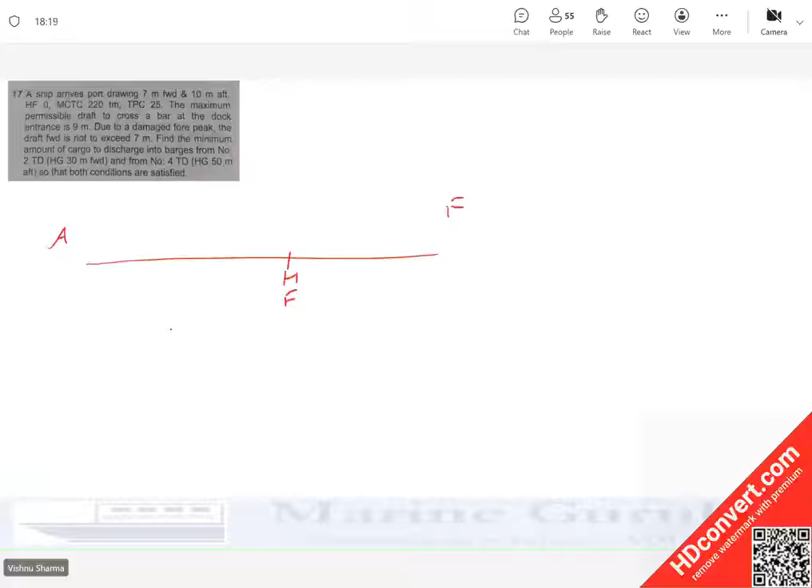So you should basically be loading to the maximum possible level so that you can safely cross the bar. So I know what doubts somebody may have. Once I make the line diagram, you will be comfortable. AF will be half the length, whatever the length is. It's not given here, L by 2. Okay, never mind, never mind, it's okay.

So forward draft is 7 meters, aft draft is 10 meters. When you cannot have the forward draft exceeding 7 meters, so you have to maintain it at 7. And aft draft, you have to cross the bar at 9 meters. That means you have to bring the aft draft to 9 meters. Correct? Yes or no? Am I right, sir? Yes, sir. Okay, so now basically you have the initial drafts forward and aft, and final drafts forward and aft.

So what you can find out is initial mean draft. And when you do the initial mean draft, L will get cancelled out. It will be the mean of these two: it will be 17, 8.5 meters will be the initial mean draft. Why? Because center of flotation is midships, right, beta? Am I right? Who had the doubt? Initial mean draft will be 8.5, yes or no, beta? It is mean of 7 and 10, correct? Final mean draft will be mean of 7 and 9, that is 16, 8 meters.

Okay, find the minimum cargo to discharge. So the mean rise that you expect is 0.5 meters, which is 50 centimeters, into the TPC of 25, that gives 1250, so many tons is the total cargo to discharge, right?

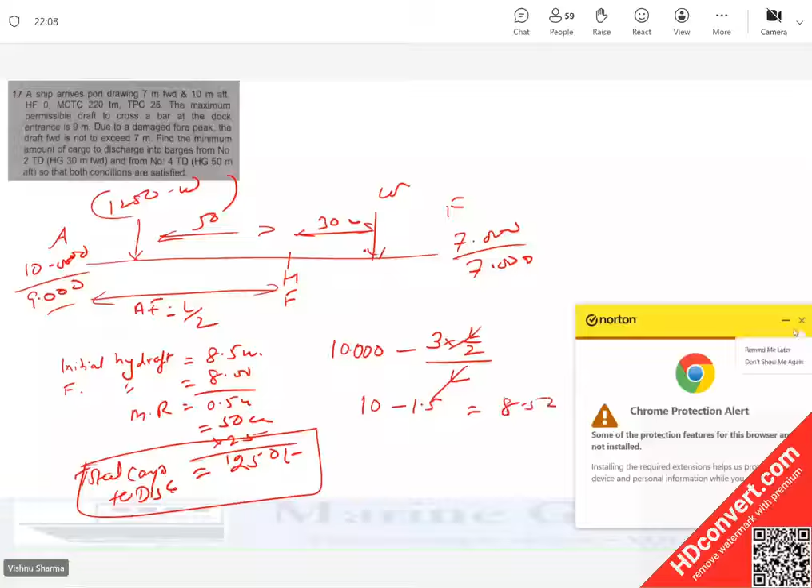You were saying aft draft minus the correction. Initial trim is 3 meters into AF. AF is L by 2 upon length, which is L. L and L gets cancelled. It becomes 10 minus 1.5, which is equal to 8.5. What is the issue? By your formula, you're getting 8.5, yes or no? Yes, L and L gets cancelled out, right?

Aft draft minus correction will also give you 8.5, yes or no? Am I right, sir? Yes sir, yes sir, right sir. Yeah, you can calculate also. So if you want to just stick to what you learned earlier, then also it will give you 8.5.

Likewise, the final draft will be 9 meters aft, 9 meters aft minus correction. Final trim is 2 meters. So 2 meters into L by 2 divided by L, L gets cancelled, equal to 1 meter, 9 minus 1 equal to 8 meters. Final draft, the mean draft is 8 meters. Correct, yes or no? Okay sir, understood sir, understood. Yeah, so by calculation also it will give you the same answer, don't worry.

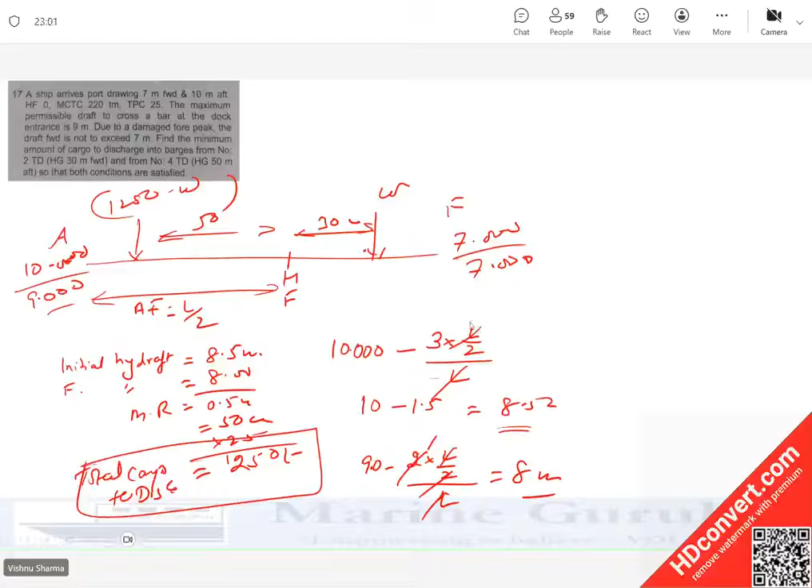Question number 13, guys. A ship 160 meters long, MCTC so much, TPC so much, HF 3 meters aft, draft so much forward and aft, from where W tons may be discharged such that the draft aft remains constant. Okay fantastic, let's make the line diagram. And guys, if anybody is not understanding, you can unmute and interject anytime, please.

Aft draft is 7.8. He wants it to remain constant. Now tell me guys, he's talking of discharging. So tell me, when you discharge, look at the aft draft, which was initially 7.8. When you discharge something from the ship, will it cause rise or sinkage? Rise. So if I apply rise to 7.8 aft, will the draft become more than 7.8 or less than 7.8?

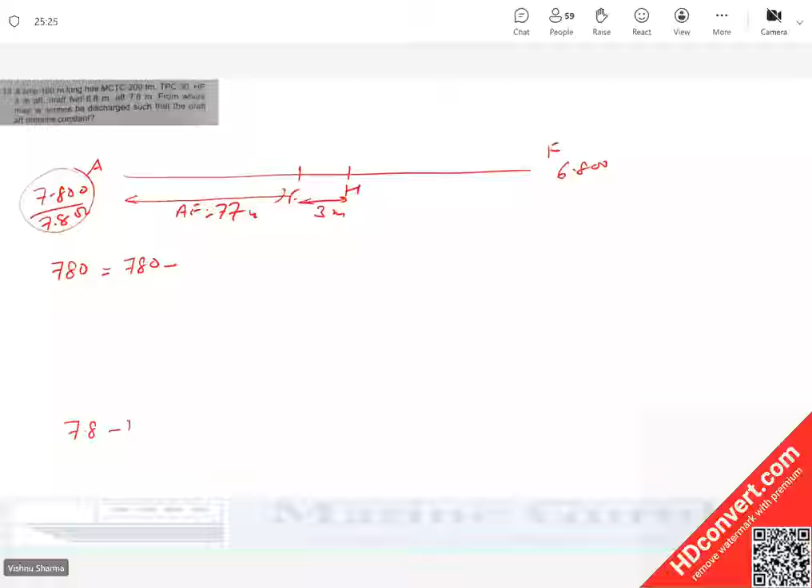I have 7.8 minus mean rise plus or minus TA. I have only two options, either to add or subtract, should be equal to 7.8. So if mean rise is minus, then TA should be plus, correct? For TA to be plus, what should be the name of the trim? By stern. For TA to be plus, the name of the trim caused should be by stern.

What is causing the trim? Discharge of W tons. So where should I discharge so that the trim is caused by stern, guys?

With respect to center of flotation, should I discharge from forward? Let us say I discharge X meters forward of center of flotation. So now you see, 7.8 gets cancelled. This implies mean rise and TA are equal.

What is mean rise going to be equal to? Mean rise will be equal to W upon TPC, and TPC is 30. What is TA equal to? It is going to be equal to TC into AF upon length of 160. Look at the line diagram. What will TC be equal to now? TC will be equal to W into X upon MCTC of 200.

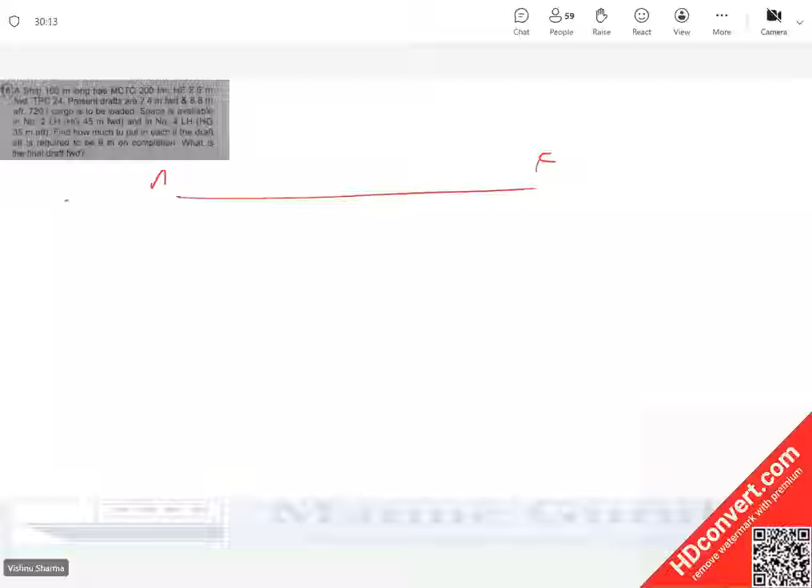So 7.4 forward draft is present. Aft is 8.8. Final draft is 9 meters, is it? Yes, 9 meters. Center of flotation, no sorry, H, my mistake, sorry, H. Center of flotation is 2.8 meters forward, so F is here, 2.8.

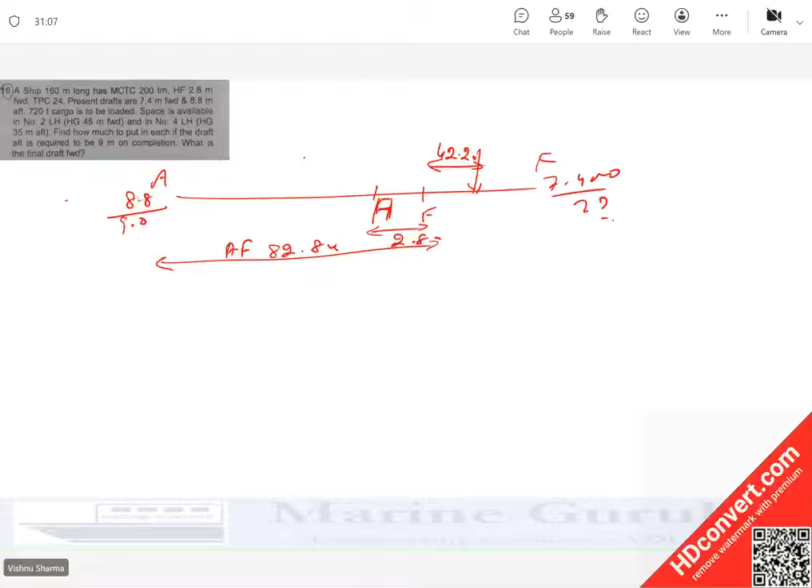Length is 160, so 82.8 meters is AF. Then you have the space available in number 2 lower hold, somewhere here you want to load. This distance is 45 minus 2.8, so that will be 42.2 meters. And you have 35 meters aft somewhere here. This distance will be 35 plus 2.8, which is 37.8 meters.

Total to be loaded is 720 tons. So let us say W tons is put here, so 720 minus W is put here. Now, what is the issue?

Tell me, Inder. Did you make a line diagram like this? Where did you get stuck now? Tell me, did you get W or not?

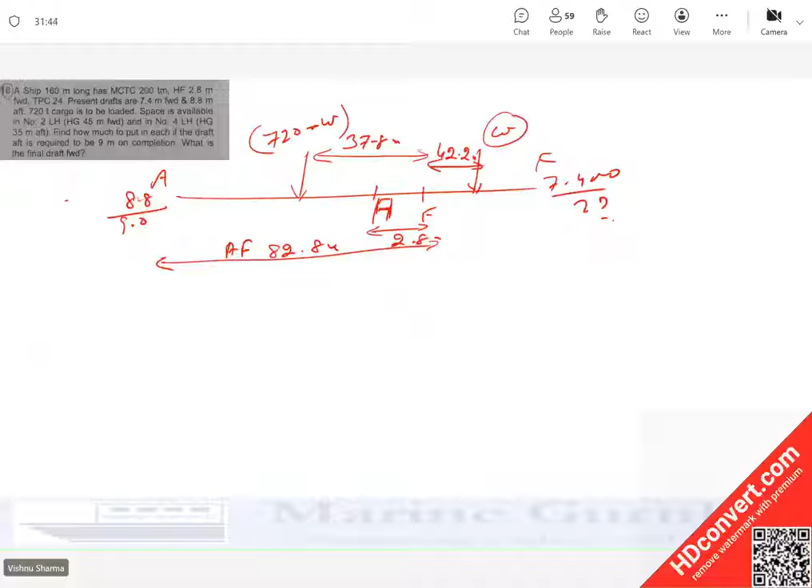Now this example, a ship - don't worry about these things, it will just unnecessarily confuse you. Don't learn anything like this. Learn it with basic fundamentals.

A ship has to load 600 tons of cargo. Drafts forward and aft are so much. This is the question we have just discussed, yes or no?

What is the issue? Yes sir, but in this, at the end to find the draft, sir, I got the weights.

Okay, let me make the line diagram. Drafts forward are 8.5 and aft is 9.7.

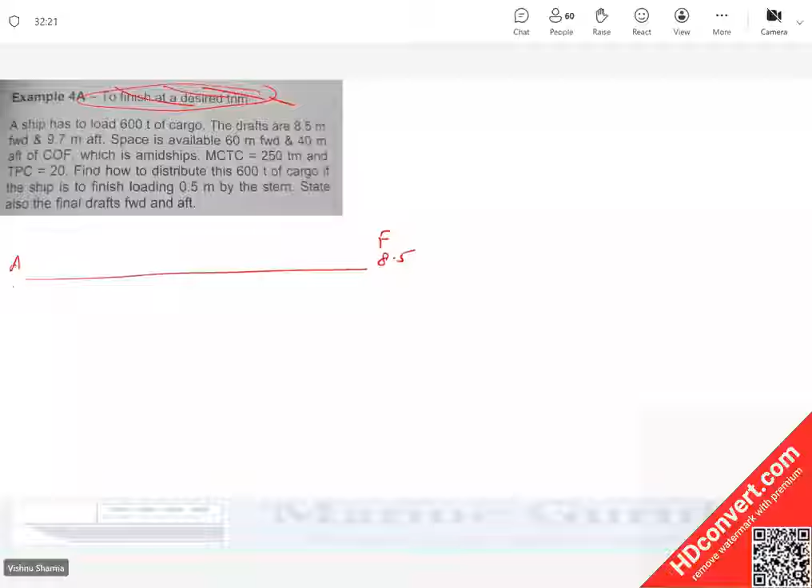HF is COF, which is midship, so center of flotation is midship. So AF is half the length.

So 60 meters forward to load, distribute if ship is so loading. Okay, so 60 meters forward, and you have another space 40 meters aft, another space available, so much, okay.

And TP, how much cargo to distribute this? How to distribute 600? So this is W and 600 minus W.

If the cargo ship is to finish loading on 0.5 meters by stern, so you make an equation in trimming moment. You know the initial trim is 120 centimeters, so final trimming moment will be 50 centimeters.

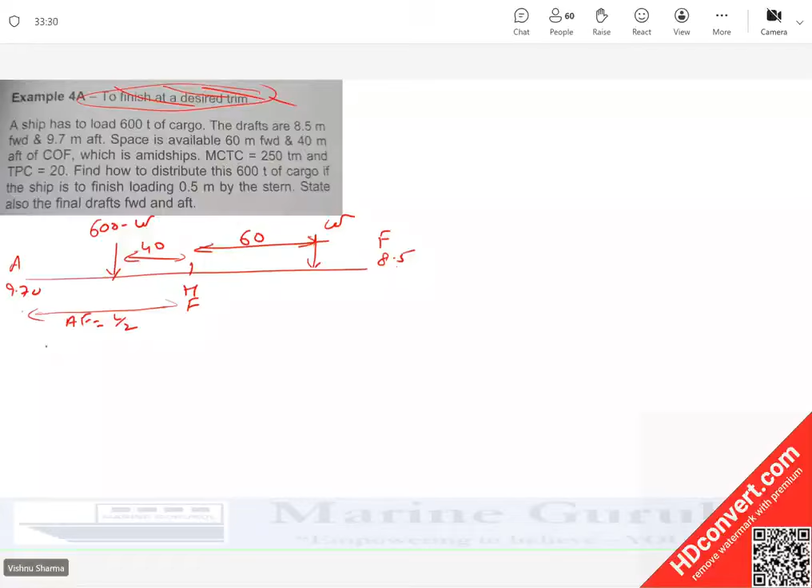So that is the trim. Taking trimming moment by stern as positive and by head as negative, final trimming moment will be plus 50 into MCTC. If anybody is not understanding, let me know.

This will be equal to initial trimming moment, which is plus 120 centimeters of trim into 250, plus or minus the trimming moment caused. W tons is going to cause trim by head, so minus 60W plus 600 minus W into 40, and this will give you the value of W.

Correct, Peter? Am I right? Yes sir. How much did you get, Peter? Abhishek, how much did you get? W? Sir, I got 185 tons.

So 185 tons, how much goes in the forward compartment? Sorry, 415 goes forward and 185 goes aft. Is this matching with the solution? Yes sir.

Okay, fantastic. Now your problem is to get drafts, right? Correct, beta? Okay, now with this, what can you do? Simply, there are two ways of handling this question.

One is you can find the initial hydrostatic draft minus the rise. So there are two ways of doing this question, whichever way you feel comfortable. One is calculate the initial hydrostatic draft, which will be equal to final initial draft minus the correction.

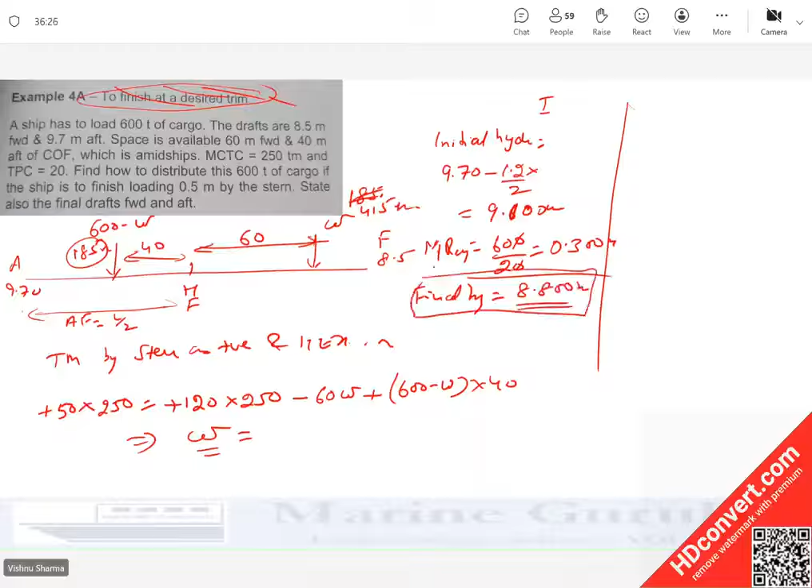Right sir, correct? Okay, what is the final trim? Final trim is 0.5 meters by stern.

You can split 0.5 into TA and TF since it's midship. It will be 0.25 meters here and 0.25 meters here. It will be equal, right?

So your final drafts will be forward and aft. Your final hydrostatic draft is 8.800, 8.800. TA and TF, and ask yourself, of what? TA TF of the final trim, which is 0.250. Since the final trim is by stern, TA will be added, TF will be subtracted, and this is one way you can get the final drafts. Okay, guys?

Abhishek? Right, so it's not matching in the question. It has to match, unless we see if we made any mistake. That's all you have to see. There cannot be. Let me calculate it the other way also, and if it does not match, then we'll see.

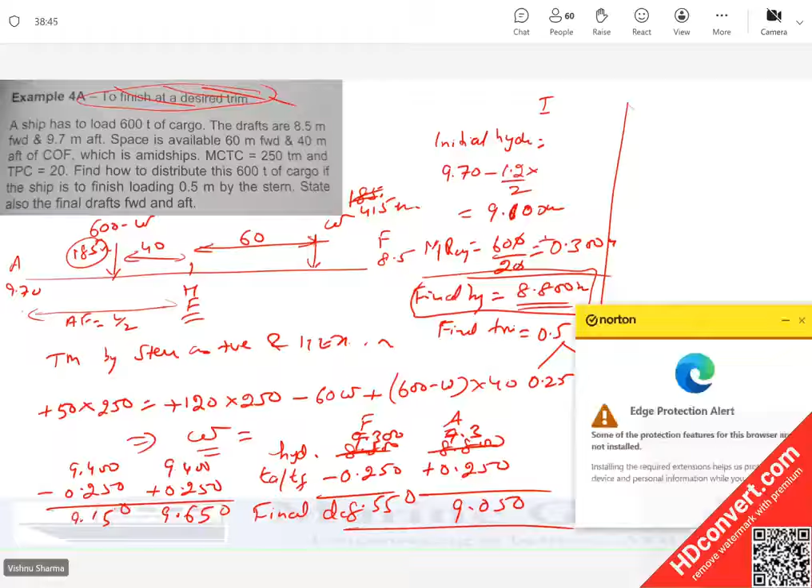Yes sir, now it's matching. 9.150, yes sir, 9.650, okay? Yes sir, that is what we didn't take. Understood.

Since I'm on the subject, let me do the other method also for the sake of people understanding it. Because when I use it in dry docking and grounding, now we know the initial draft forward, we know the initial draft aft. By using this, we can find out the trim caused. Now we know the trim caused.

Actually, when you have the final trim, you don't have to calculate initial and final change in trim, you can write like this. Initial trim is how much? 1.2 meters by stern. Final trim is how much? 0.5 meters by stern. So trim caused is 0.7 meters by head. Is that clear to everybody? Change in trim is 0.7 meters by head, right guys?

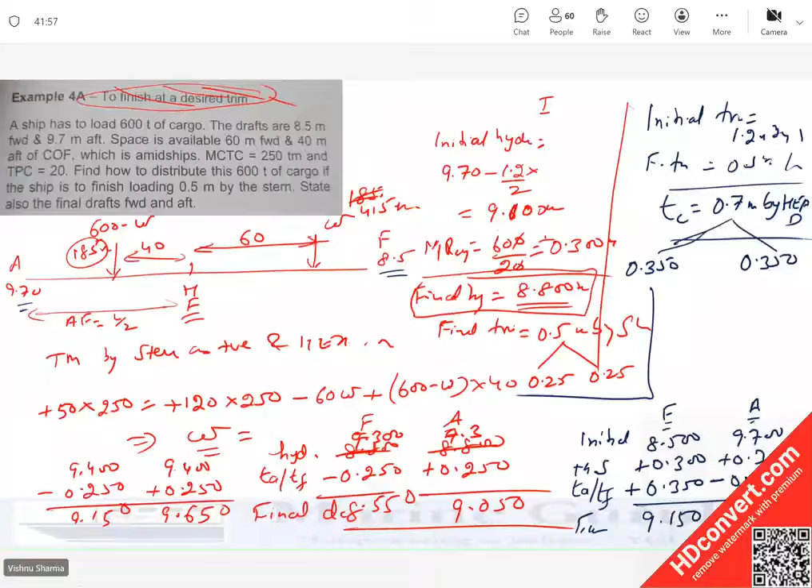If you want to learn like this, tell me.

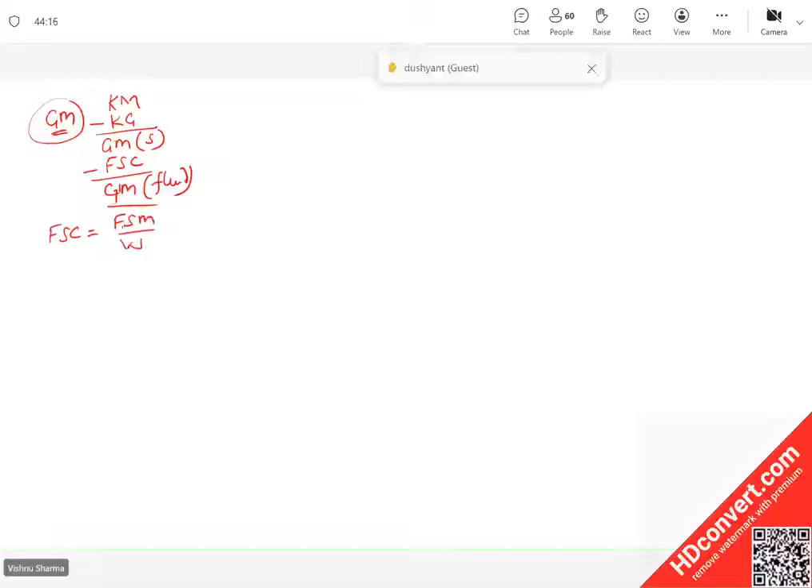No sir, no question. Okay, so how do you calculate FSC, guys? FSC is equal to FSM upon displacement, right? And that goes here. That is one part you need to recall.

Second, when you discharge weights, let us say we have a ship like this. Let's say the ship has a weight W here, whose kg is, let us say, kg1. And now the ship's full displacement is capital W, and the center of gravity of the ship is here.

Now, if the weight is discharged, which side will the center of gravity of the ship shift? Tell me, guys. If this weight is discharged, small w is discharged, which side will the center of gravity of the ship move?

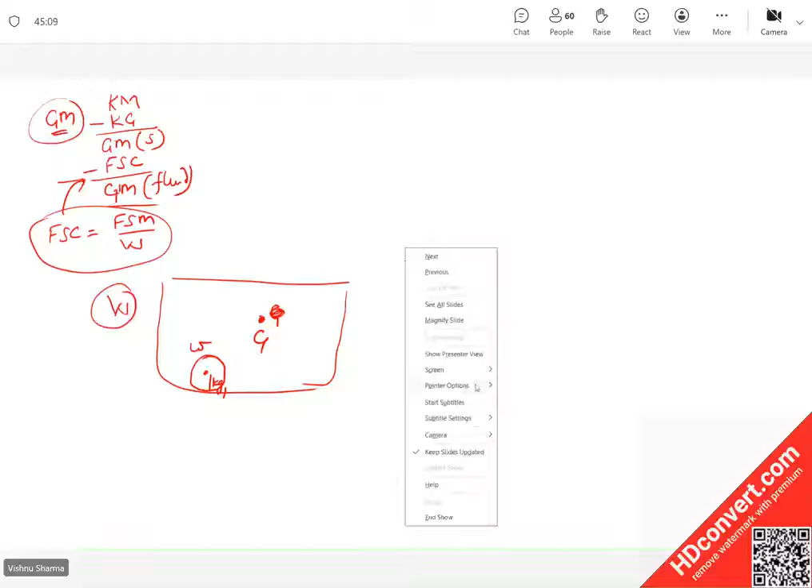Away from the discharge weight, upwards. So you join these two lines, and it will move in the opposite direction somewhere here. I'm not interested in how much starboard or port it has gone. Since I'm talking of GM, what will affect is how much it has gone up. So we are only interested in this component of the shift.

And this component, in pre-sea, was called GG1 vertical, downwards or upwards as the case arose. And when weight W was discharged, what was the formula for how much it shifted? This is that GG1. In this case, it is upwards. In some other case, it could be downwards also.

And we know from pre-sea, it was D vertical upon, in this case, since we have discharged, generally it is W final displacement. But in our case, since it was discharged, it is W minus w. I'm sure all of you can remember this formula now from previous learning.

Anybody has any doubts? Guys, tell me if any doubt is there. I'll be happy to answer it now.

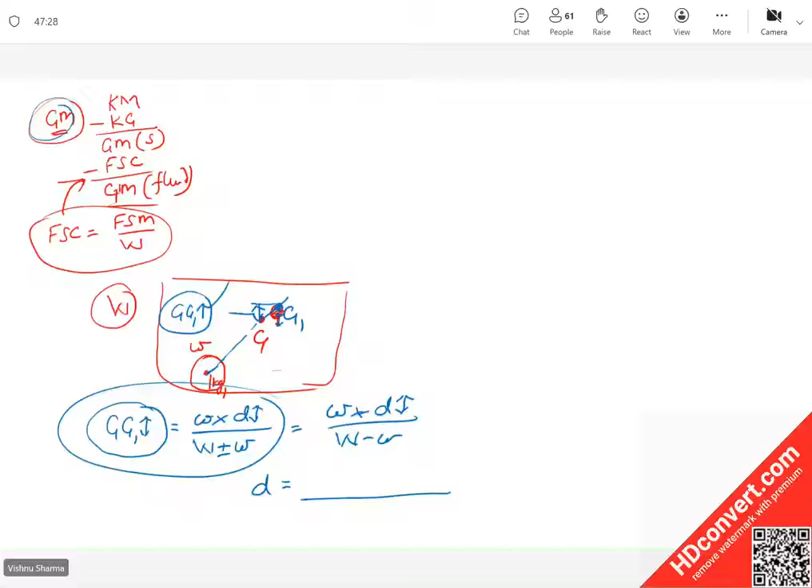It's the vertical distance between the kg of the ship before operation. Before operation, where was the center of gravity? At G. And center of kg of weight W. It is the vertical distance between them. Danny, can you remember it now? Yes sir, yes sir.

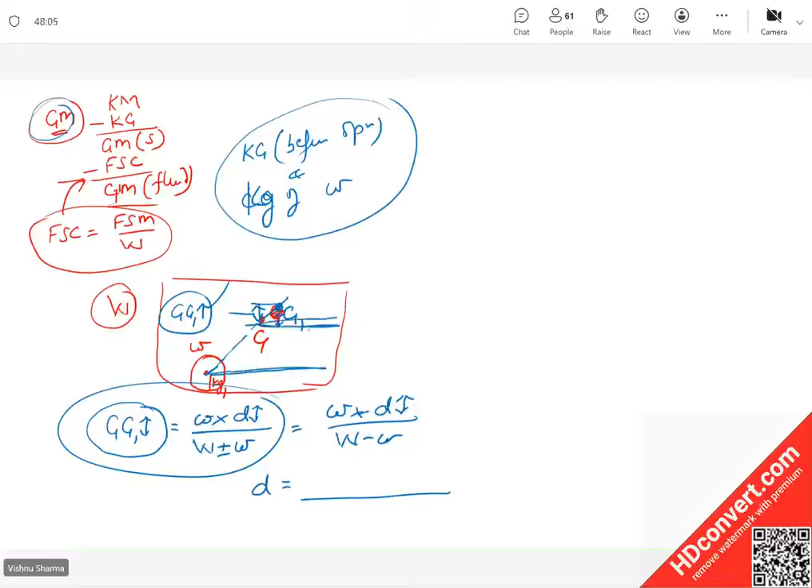Okay, so please don't make these mistakes. So in this particular case, here was the center of gravity of the weight. Here was the center of gravity of the ship before discharging. D will be this distance. Correct, beta? So it will be basically what? Kg of the ship before discharging minus the kg of the weight involved. Correct, beta? That is your D here. Am I right? Correct, yes sir.

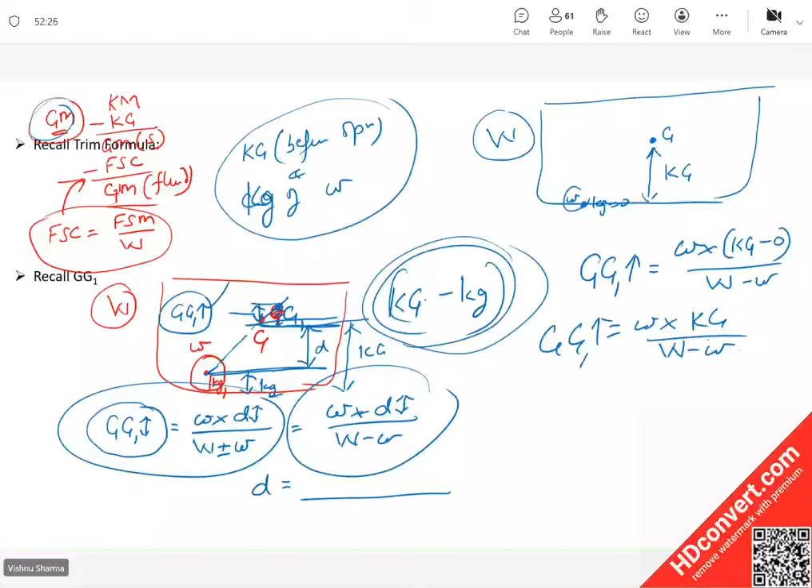Am I right, guys? And G will move upwards. Correct? Yes sir. So guys, remember, if a weight is theoretically discharged from keel, then it will shift the KG of the ship upwards to a distance: w into KG of the ship before the operation, divided by W minus w. And we have used this GG1 formula - we have not done anything new, correct? Remember it, don't forget.

Okay, now tell me secondly, yesterday we did the trim formula. Let us say we have this ship's forward end, this is the aft, and it can be either side, doesn't matter. Let's say here is the center of flotation. This distance we all know is AF or LCF.

Now suppose if I discharge some weight from here, let us say P tons. Will it cause a change in trim, yes or no? Yes sir, it will cause a change in trim. How much will be the change in trim? We have done the formula yesterday.

That's why we were doing it - look at that line diagram and answer. What will be the change in trim? P into LCF divided by MCTC. Does everybody agree?

This is P multiplied by lever AF, divided by MCTC, will be the trim caused. Does everybody agree with it? Yes sir.

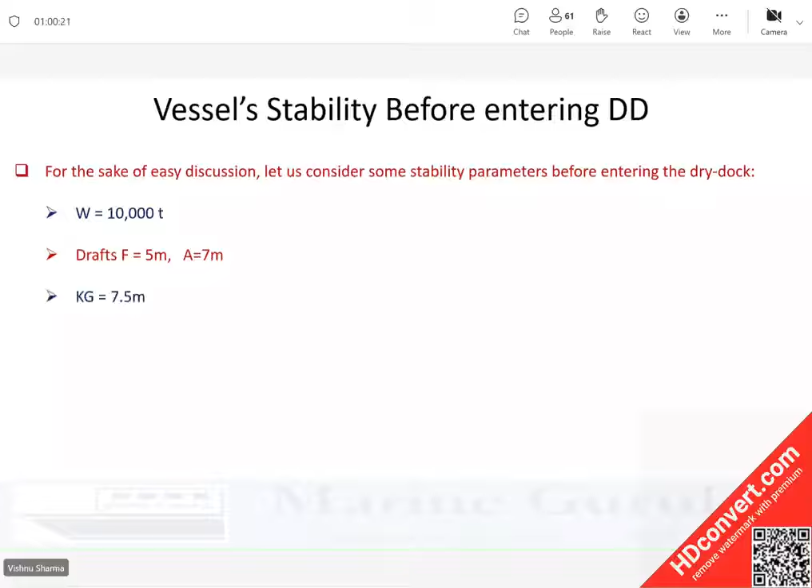Let us say the ship has a displacement of 10,000 tons. Her drafts are 5 meters forward and 7 meters aft. Her kg is 7.5, LCG is 70 meters, and her buoyancy obviously will be equal to displacement. Why? Because the ship is floating freely as per the law of flotation. So what will support the weight? The buoyancy will support the weight.

Does everybody agree with me? The ship comes outside the dock like in this condition, correct? Now the gates are opened and the ship is taken into the dock.

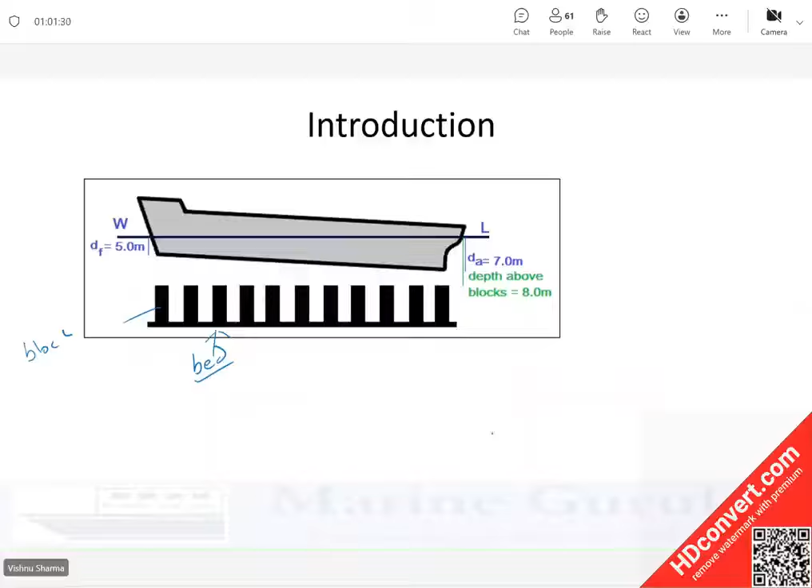Do you think anything should change in this condition? No. So that means just because she has come from outside the dock to inside the dock, her stability particulars remain unchanged and there is no change in stability. Does everybody agree with me?

Let us say here the depth in the dock is 8 meters. When we say depth in the dock, we mean the level of the water above the top of the blocks. This is what we'll call the depth, not from the bottom of the bed, because the ship is going to be stopped by the blocks. So we are not interested in the depth below the blocks. So if the depth is 8 meters, what will be the UKC of the ship in this case? Look at the diagram. 1 meter. So there will be 1 meter UKC here.

Now the gates are closed and pumping out starts. You have seen the ship in a tidal port. What happens? As the tide rises, the ship rises with the tide. When the tide falls, the ship comes down with the tide. Am I right? So now here, you are dropping the level of the water, not because of the tide, but because you are pumping out.

Let us say now the depth is reduced to 7.5 meters. What will happen if the depth from 8 meters is reduced to 7.5 meters? What do you think will happen? This water level will start coming down, and with the level falling, the ship will also come down. Will there be a change in draft? Do you expect any change in draft if the level is reduced to 7.5 meters?

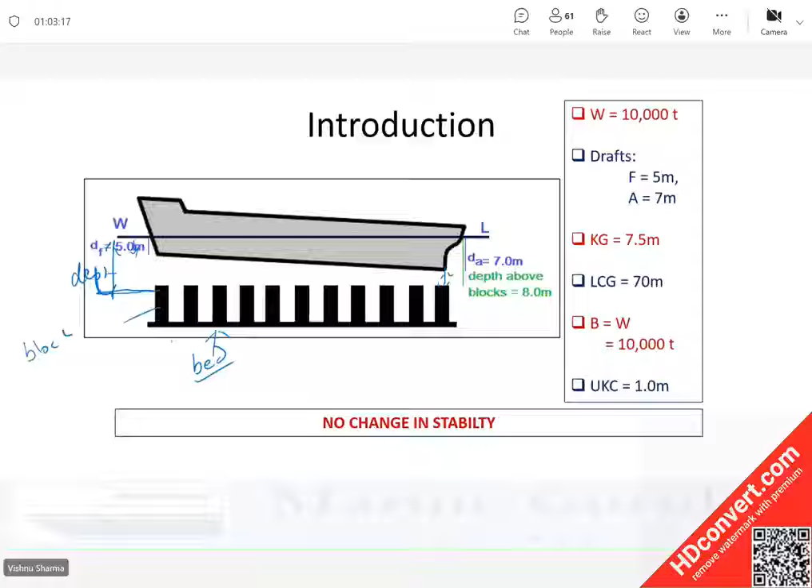No, sir. If the depth is now made 7.5 meters, you don't expect any change in the stability. Only thing is the UKC, the underkeel clearance, has now reduced to half a meter. Only the UKC has reduced. Otherwise, there is no change in the stability of the vessel.

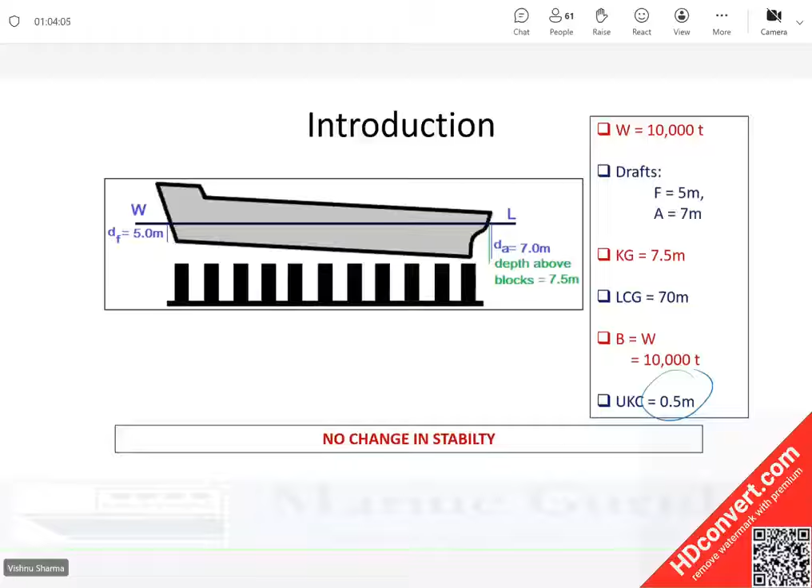Now I am saying the depth becomes exactly equal to 7 meters. That was the draft aft. Exactly 7 meters. What will be the UKC then? If the depth becomes equal to 7 meters? Zero. What will be the draft aft? If the depth is 7, it will still be 7 meters. Am I right? So if the depth is now made 7 meters, exactly equal to the draft aft...

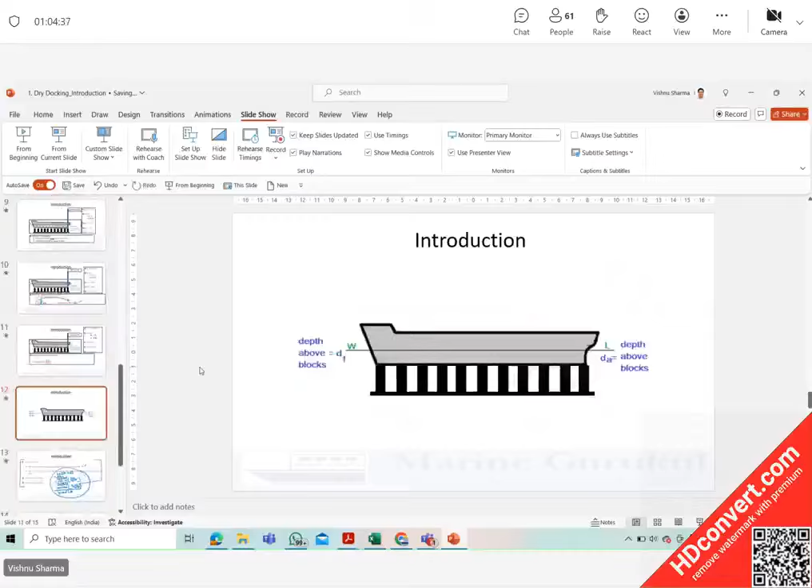Okay, let me just clear this part. Now the depth is 7 meters. Now, UKC definitely has become 0.

Do you expect any change in the stability of the ship, like drafts, buoyancy, center of gravity? No, sir. So what has happened? The vessel has established a light contact with the blocks. Where? At the stern. So we use the word light contact. Contact is made. It is just a contact, nothing else.

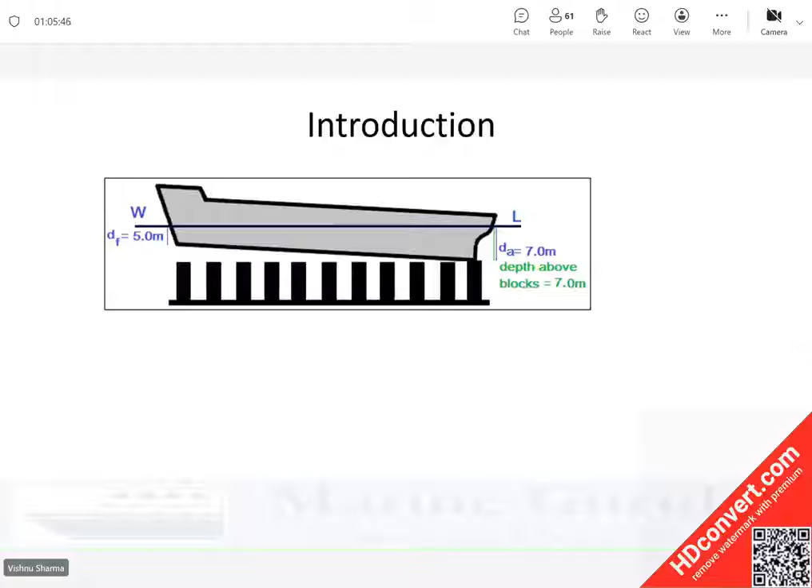In a crowd, when you're standing next to each other, one person may be touching the other. It doesn't mean the other person is still pushing it. So there is a touch, there is a contact, but there is no effect of that contact on the other person when it is only just a mere contact. Am I right, guys? So here the ship has made contact with the blocks.

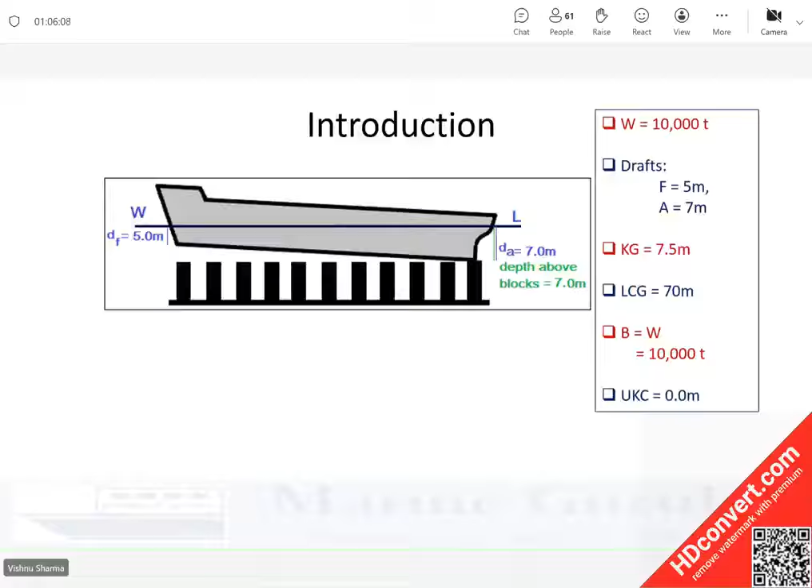But is there any change in the stability? No. So the only thing that has changed is the UKC has become 0. But UKC is an external thing. It has nothing to do with the stability. Stability remains unchanged. Does everybody agree with me here? What is supporting the 10,000 tons of displacement in this case, guys?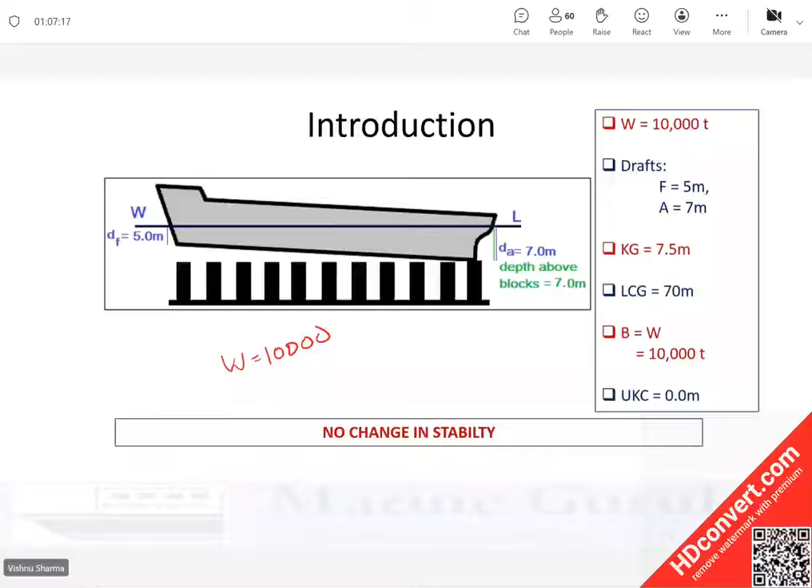In this case, what is supporting the displacement? What is supporting 10,000 tons of downward force? Buoyancy, sir. Why? Because there is still so much underwater volume, and the weight of water displaced has not changed. So the buoyancy has not reduced, and hence in this case also, though there is a light contact, the full displacement of the ship is supported by her buoyancy.

Guys, as the depth reduced from 8 meters to 7 meters, the water level was coming down, and with that the ship also continued coming down, because there was underkeel clearance. But now the underkeel clearance has become zero. Can the ship continue going down if the level further falls? No, sir, it cannot go down further. The stern will be blocked by the blocks, which will check the stern from going further down.

So what was happening was, all this while, the ship's forward draft and aft draft remained unchanged. That means the water line and the ship, relative to each other, their position was the same. But now, suppose I bring the depth to 6.5 meters. What will happen? This liquid level will fall, but the ship cannot go down. So now the liquid level may be somewhat like this - not exactly, but don't worry. Level has come down, but the ship cannot come down.

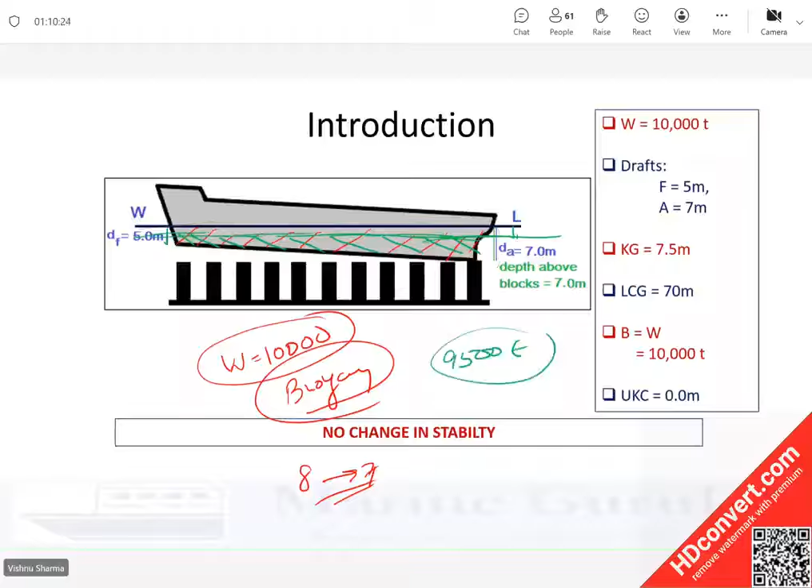Let's say this green volume provides buoyancy of 9,500 tons, just as an example - it has to be less than 10,000, so let's say it's 9,500 now when the level falls to 6.5 meters. What will happen now? 10,000 tons is the downward weight of the ship, out of which 9,500 is supported by the buoyancy. But what is the resultant now? There is a resultant 500 tons of force, downward.

Upthrust - you have 10,000 tons acting downwards, and 9,500 provided as buoyancy. There is a resultant or net force of 500 tons acting downwards. Where will this force exert? This force will exert wherever the ship has made contact with the block. In our example, the ship has made contact at the stern.

So if the contact has been made at the stern, this 500 tons will be exerted downwards by the ship on the block. And what is Newton's third law of motion? To every action there is an equal and opposite reaction. So when the ship exerts 500 tons of downward force on the blocks, the block will exert 500 tons of reaction acting upwards. Whatever force is exerted on the blocks, the blocks will exert equal and opposite reaction. This reaction in dry docking is called upthrust.

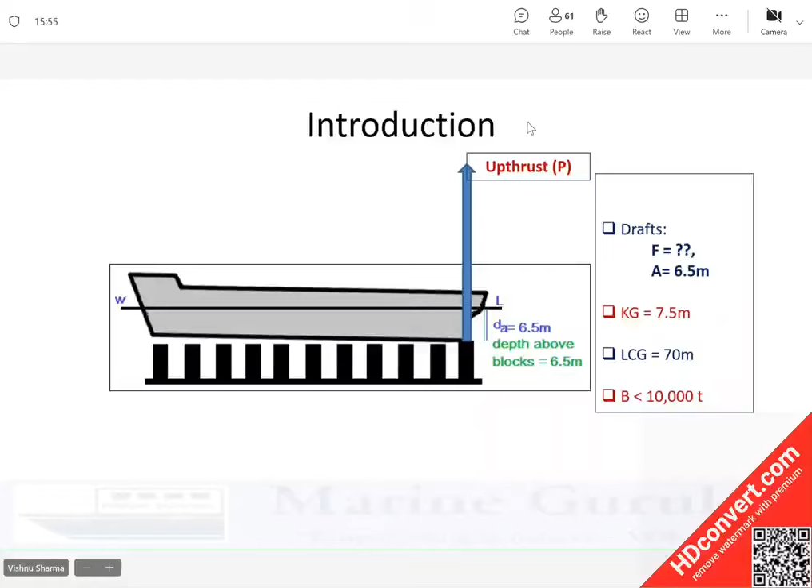Sir, no, I'll not create confusion by doing both parallelly. I don't do that in class. Because if we go with parallels, then everybody will say, can you solve both questions both ways, all the questions both ways? That will not happen, Akshay. If you want to continue with the other one, it's up to you, it's your choice, but it's not possible to cover the content with both methods here.

Okay, that is P into Km upon W, right? Yes sir. So you want to use just that one thing? So this kg, will it be initial kg, or will we take this for W minus P?

To remove this confusion, how many kgs are there? Now there is only one kg. Has the kg of the ship actually changed? Have you actually discharged something? Understood, you have not discharged any weight. So the kg of the ship can only change in three cases: one, you load something; two, you discharge something; three, you vertically shift something. These are the only three things which can cause the kg to actually change, right?

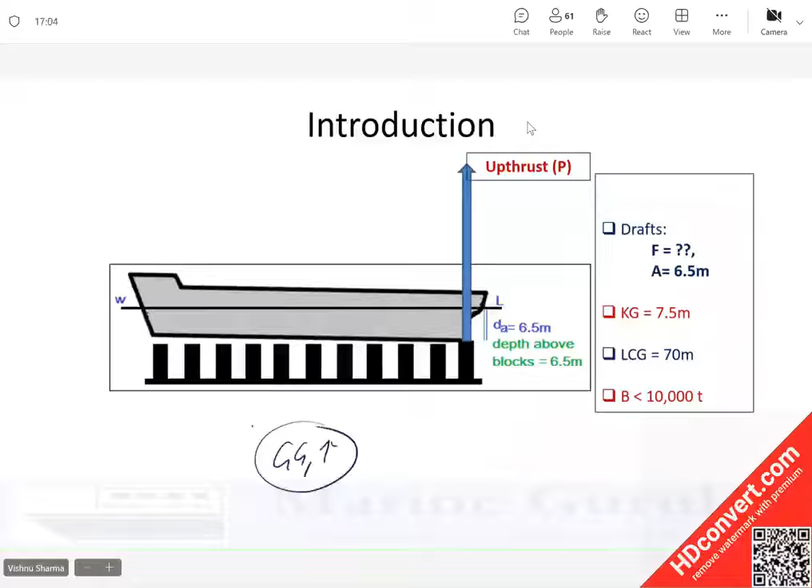And since none of these three things are happening, the kg of the ship is not being touched, and therefore this GG1 upward, which came from the GG1 upward formula, is not applied to kg. This is called virtual loss of GM. Is that clear?

Yes sir. So we say in dry docking, under this concept, where upthrust is assumed to be the weight virtually discharged from the point of contact, that leads to a virtual loss of GM. And what is that equal to? P into kg upon W minus P.

Now, why I prefer this method is because you know how this formula has actually come. Otherwise, just doing the formula, either I take the derivation and make sense out of it, or the other formula. I'll just give you an overview: it's based on the fact that buoyancy has reduced to W minus P, and this buoyancy W minus P is acting upwards, and P is also acting upwards, so they say this is acting as supplementary buoyancy. So when buoyancy of W minus P is provided by water, and P buoyancy is provided by the blocks, the total buoyancy becomes W minus P plus P equal to W. That is the other concept which we are not going to go into.

For us, since we are all familiar with this discharging concept, when you do the questions, you will realize how simple it becomes if you follow this method, because it connects with what you know. Not that the other method is too difficult to follow, but that method will not connect with your prior learning, this will directly connect with what you know. So the virtual loss of GM under this method will be P, the upthrust, into the kg of the ship - ship has only one kg in dry docking, that is our actual kg, upon W minus P. Is that clear, beta?

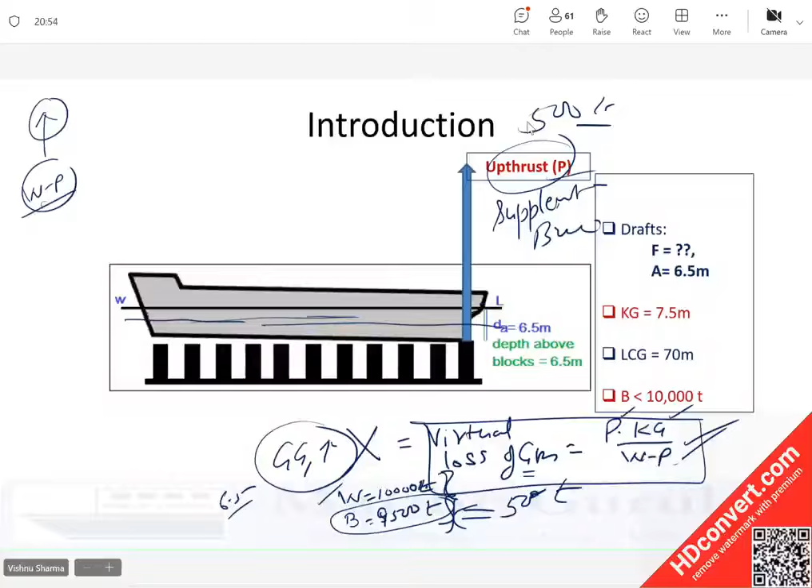If buoyancy decreases, then will the P increase or remain same? P will increase, because buoyancy support is reduced, more weight goes to the blocks, exerting more reaction.

And if P is increasing, look at the formula, will the virtual loss increase or decrease? Increase. So as the level keeps falling, the virtual loss of GM keeps increasing.

And the problem is, this is why you need to be careful that the vessel should not become unstable. But somewhere the vessel will become unstable because ultimately we will be drying up the ship.

So first tell me, when did the loss start taking place? We did many stages: one, she entered, then the level came to 7.5, then level came to 7 meters, then level came to 6.5.

In our example, when did the virtual loss start, or when would the virtual loss start? When the keel touches. Virtual loss will start when upthrust comes into picture.

When will upthrust come into picture? Only after the first contact is made, right? First contact with the blocks is made, right? Correct. So that means the virtual loss of GM because of dry docking will start only when the vessel makes first contact with the blocks.

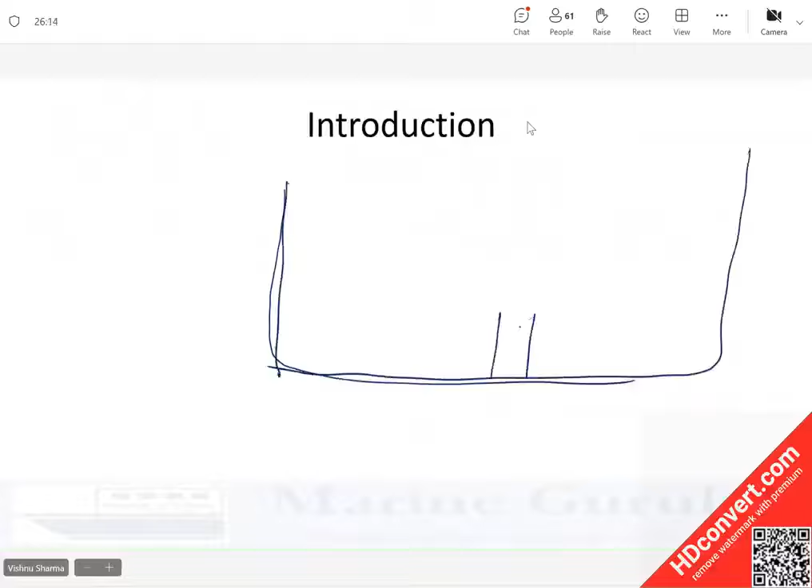When she makes contact all along the length, look at the cross-sectional view of a dry dock, graving dock. This is how a graving dock is. You have centerline blocks and side bilge keel blocks - one set of blocks on this side and another on that side.

Until the ship sits completely, she is on single point contact at the stern. But when she sits completely, the ship will be sitting on the blocks like this. This is how the ship will be sitting in the dry dock once she takes to the blocks overall, correct?

Yes sir. When she makes contact with the side blocks, is there a risk of ship tilting sideways? Can the ship now tilt sideways? No sir. That means if she goes into unstable equilibrium, her GM becomes negative - can she topple sideways? No sir, the blocks are supporting her. These blocks will not allow her to topple.

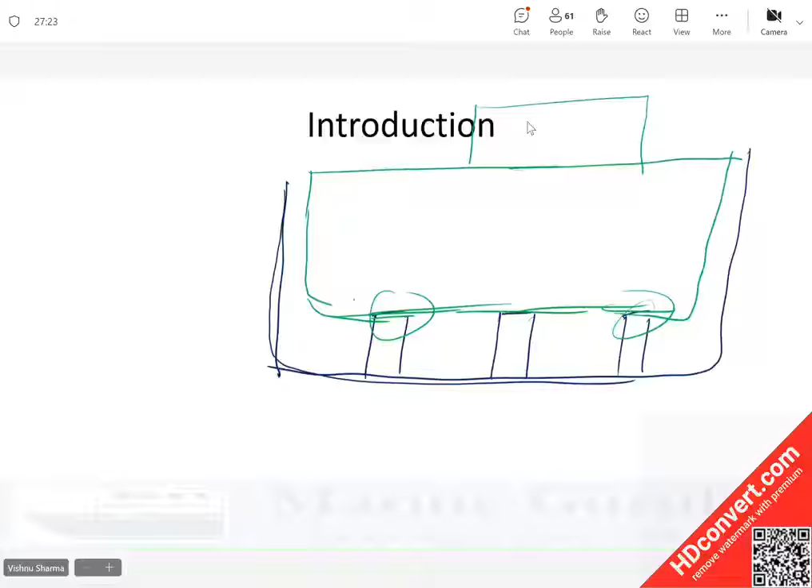In the olden times, when the keels were narrow and ships were shaped like this, when the ship came into contact all over, she was supported by side shores so that she does not topple on the sides. Now, because you have flat bottom ships, these shores are not required because the bilge keel blocks will support the ship.

So that means my ship does not have a risk of tilting sideways after she sits on the blocks completely. Am I right in my statement? My ship does not have the risk of tilting sideways when it sits on the blocks completely, yes. So even if the GM becomes negative after she sits completely, let it be - because the ship is supported, she cannot fall sideways.

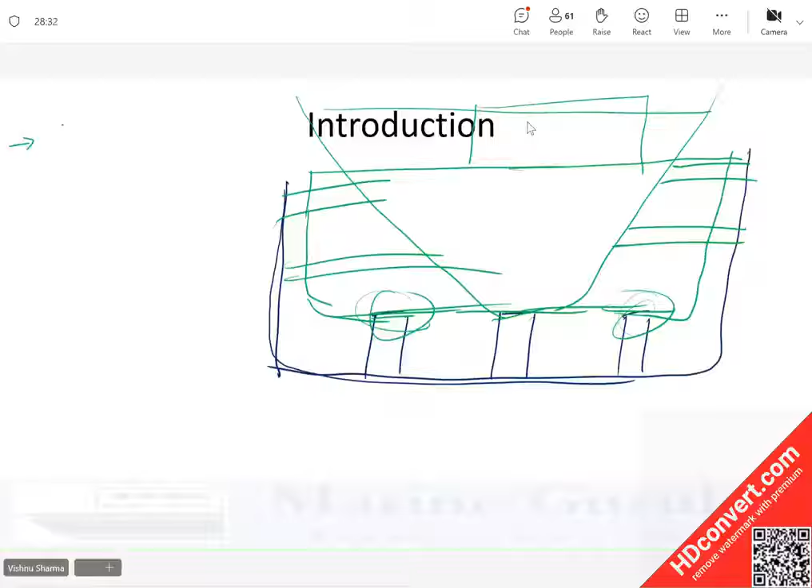So when did my risk start? My risk started in terms of loss of GM - it started when the vessel made first contact with the blocks. That is when my risk started. When does my risk of tilting sideways end? When the vessel takes to the blocks all over.

This period, from the time she makes first contact to the time she sits completely on the blocks, is very, very critical for dry docking. Why? Because during this period, if the GM becomes negative, the vessel will topple sideways. Therefore this period is called the critical period - this comes in theories sometimes as critical period.

Critical period in dry docking context is the interval of time between the vessel making first contact with the blocks to the time she sits on the blocks all over. This interval is called the critical period. Understood, beta?

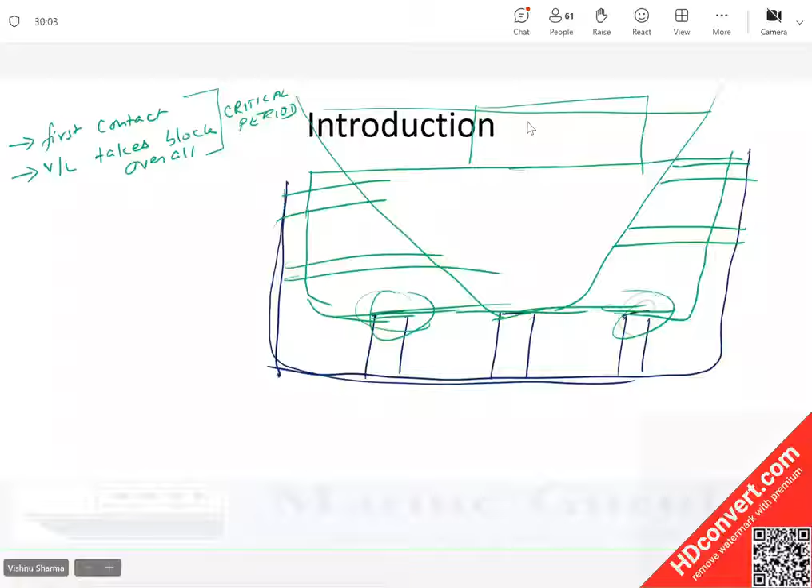And why is it called critical period? Because in this critical period, if the GM becomes negative, the vessel will topple sideways, and therefore this period is critical. You do not want the GM to become negative during this period. Once she sits completely, then even if the GM becomes negative, it does not bother us. Is that clear?

So critical period starts at point one, first contact, and it ends when the vessel sits overall. During this critical period - whether at the first point, at the second point, or in between - this is the critical period. In this critical period, when is it most dangerous?

Is it most dangerous at the beginning, number one? Is it most dangerous towards the end, number two? Or is it most dangerous somewhere in between? Towards the end, sir. Why? Okay, somebody said number one.

Tell me, why do you think number one is the worst case? Sir, in my opinion, because at point one she is subject to topple both ways. No - in number two also she can topple both ways, and in between also she can topple both ways. Why sir, she cannot? What do you mean by both ways? Sir, in number one she is only touching one block, so relatively she should be less safe. How many points is she touching here? How many points is she touching here?

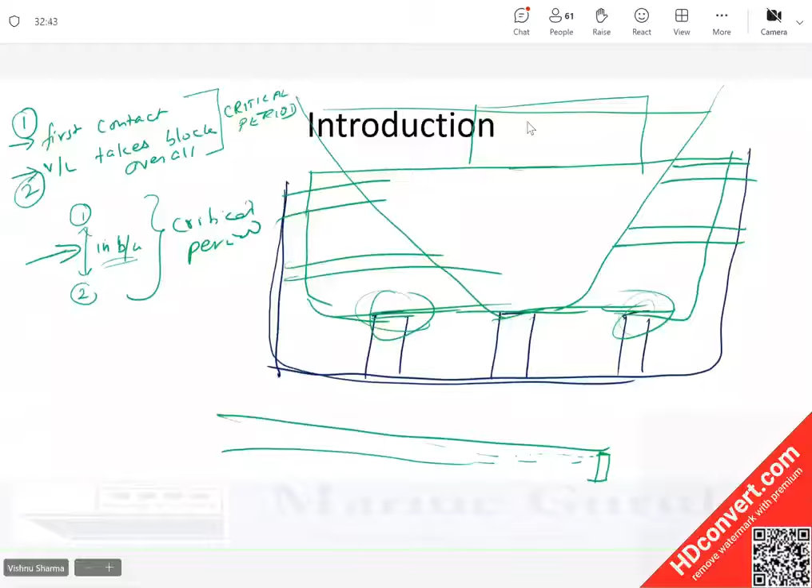Impact कम हो सकता है। Did I ask you about impact? When she falls sideways, there will be one impact only, that she'll topple sideways. There is no other impact. Okay, sideways falling.

What do you mean by less impact? Uda? Yes sir, what do you mean by less impact? We are not talking vertical fall, she'll topple sideways, my friend. Yes sir, so sideways, what do you mean by less impact?

That water level is now reduced so that... ठीक है sir, it does not make sense. So now tell me which point will be the worst case scenario.

Number 2, sir, just before she touches all over. Very good. Since this is the worst case scenario, why? That she's still on single point contact and she has experienced the maximum loss, maximum virtual loss of GM during the critical period.

Of course, loss of virtual GM will keep increasing after the critical period also. But during the critical period, maximum virtual loss is experienced here and vessel is not adequately supported. So that means this is the most dangerous instant or the point or the scenario, and this is called, again a technical term, critical instant.

Second, the vessel is sitting, takes block of... no, better. There is a difference. At 7 meter draft, in 7 meter depth, in our example, the vessel had made contact with the block. But was there any upthrust in that case?

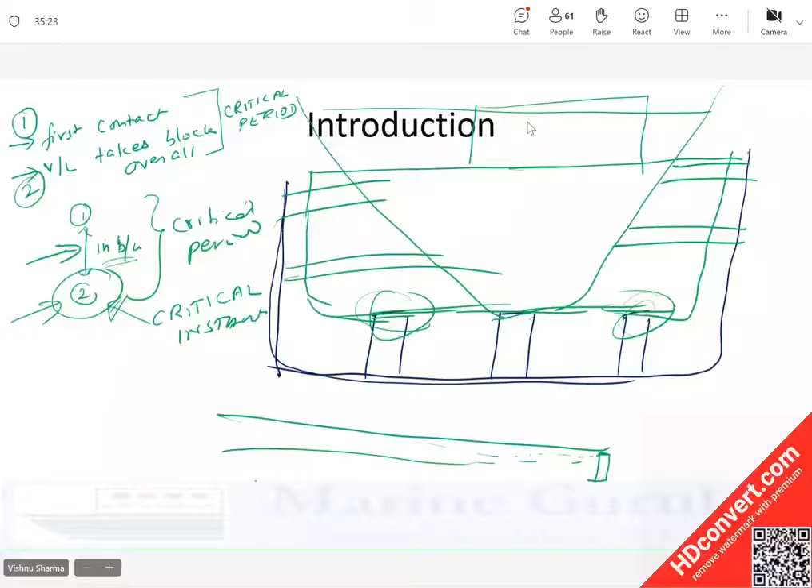I'll tell you something. Suppose on a spring balance, you have a table like this here. You have a spring balance here, and you put a weight, let us say 20 kg on this. What is the dial showing?

20 kg. Now you keep lowering this, so this clearance is reducing. A stage will come where the block will make contact with the table lightly, but the gauge is still showing 20 kg. Correct beta? Am I right? Yes sir.

Yes, what has happened? Touch has been made, but the table has not taken any weight yet. Correct beta? Touch is made, but the block weight has not been taken. The way I told you, in a crowd, somebody may be touching you, but neither his weight is coming on you nor your weight is coming on the other person, right?

Correct? Okay sir. But when in the crowd, somebody pushes, what happens? The weight is transferred to the next person. Am I right? Yes sir. So now, if you bring the balance further down, what will happen?

Maybe it starts showing 15 kg. That means what happens? 5 kg has been transferred to the table. Yes sir, if you completely release it, the entire 20 kg will be taken by the table, correct? So when the vessel makes first contact all along the length, it is similar to vessel making first contact at the stern at 7 meters depth.

That means contact is made, weight has not been taken by the blocks all along the length. So we call it as 'just sitting overall'. The word 'just' means there is a light feather contact, but that contact has not made any effect to the stability because the blocks in the forward part, midship part, elsewhere along the length are yet to take the weight of the ship. Is that clear, beta?

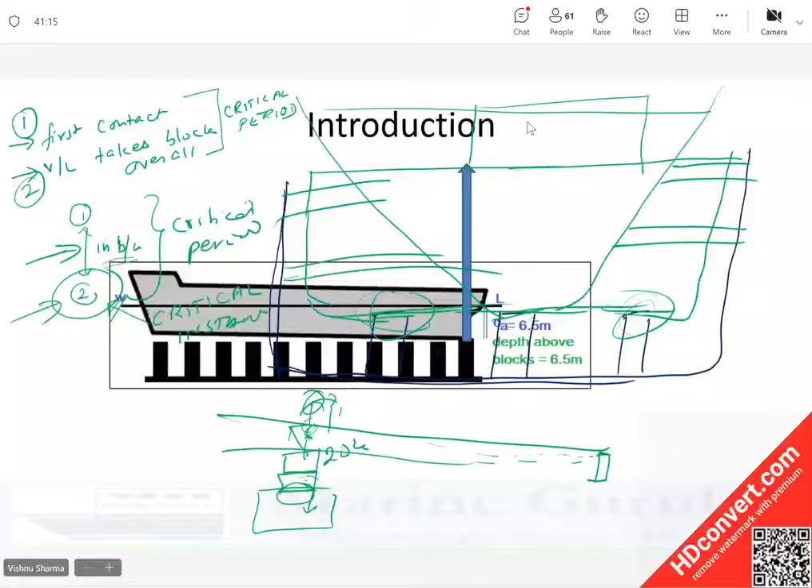Okay, so now what will be our challenge in the questions? Our challenge in the questions will be how to get P. Now, there are two ways of getting P, guys, and there are only two ways. One we just saw, that when we had a displacement of 10,000 tons, we had buoyancy of 9,500 tons. We said P was 500 tons. That means at any stage, the displacement of the ship is the displacement of the ship, guys.

In dry docking, there is no second displacement. There is only one displacement of the ship. Why? Because actually no weights are loaded, no weights are discharged. Whatever P we are treating, we are calling it a virtual discharge. It's not actual discharge. So this displacement minus buoyancy at any stage: if we can get the buoyancy and we know the displacement, the difference between the two will be the upthrust. Yes or no, beta? Am I right? Yes sir.

The second was when P is acting at the after perpendicular and your center of flotation here, then trim change was P into AF upon MCTC. So if you know the trim change that has taken place, you know the MCTC and you know AF, you can get P equals trim change caused in centimeters, remember that, into MCTC upon AF, and that will give you the P. Yes or no, beta?

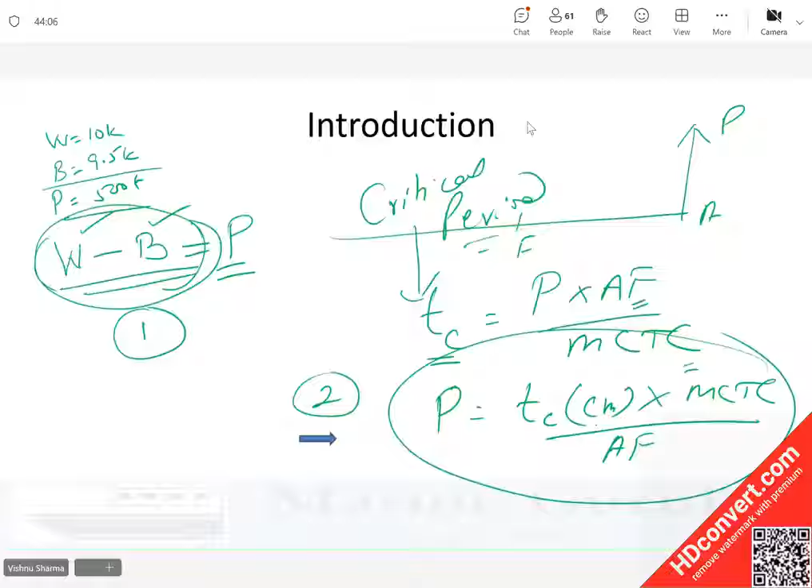So this second formula applies only when there is a change in trim. And when does the change in trim happen? It happens only during the critical period. So the second formula can be used only during the critical period, or during the period when the trim is changing. The first formula can be used any time during the dry docking, at any stage. Am I clear, guys?

Okay, this I've explained, so there's nothing to worry about. This I've done, that's okay. This has all been explained. This is done, don't worry. Done. Okay, how to obtain P?

I just told you there are only two ways to get P. One, before the vessel takes to the blocks overall, that means this phase is the critical period. During the critical period, it is by the change of trim formula, you can use it. And at any instant, including the critical period, you can always find it with the difference between the displacement of the ship and the buoyancy support available at that time. So it is W minus B. These are the only two ways to get P, and we'll be able to solve it.

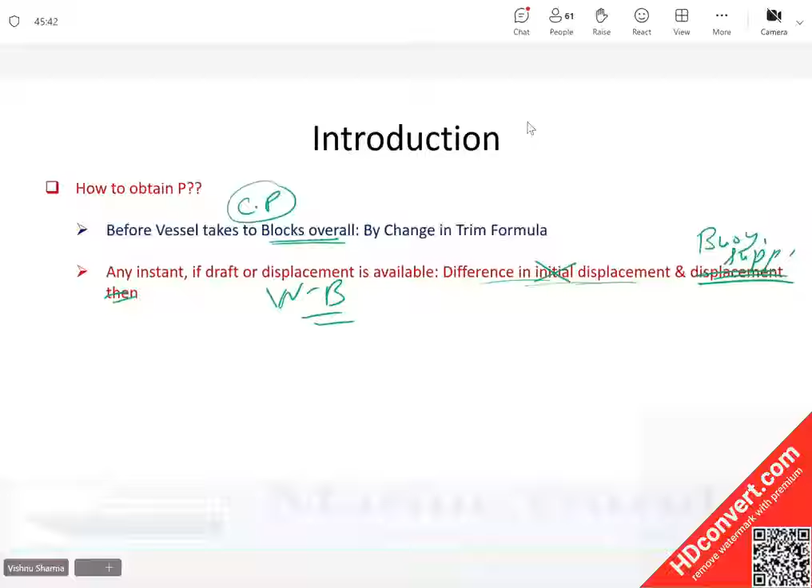Once we get P, then we have to find what is the GM of the ship. And what do we do with the GM, guys? I have described the critical period, I have described the critical instant, you know it. Now, virtual GM calculations.

We know if outside the dry dock, how the GM would have been calculated: KM minus KG gives GM solid, minus FSC gives GM fluid. This would have been the GM if the ship was not in the dry docking process. But in the dry docking process, there is an additional loss of GM which comes into picture, which will virtually further reduce the GM. So the GM calculation shall be KM for W minus P.

Now you'll say why this KM should be taken for W minus P. Guys, in your hydrostatic tables, the KM is given against the draft, am I right? So when the water level keeps falling and the ship cannot go down, she has made contact with the blocks, are her drafts changing? Yes, the draft starts reducing after that, correct? After the contact is made and the level starts falling, yes sir, it reduces.

So if the draft starts reducing, the KM should be for the reduced draft, correct? Because KM depends on water plane area and KB. So what does the draft correspond to? That will correspond to the virtual displacement W minus P. Why am I calling it a virtual displacement? Because P is virtually discharged. So the virtual displacement will be W minus P. So now you understand why KM should be taken for W minus P. Is that clear, or does anybody have any doubt?

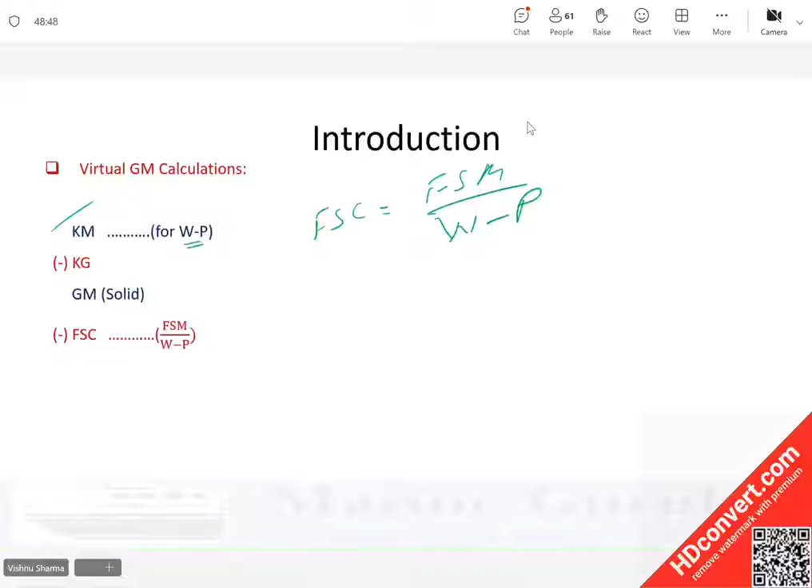Minus FSC. Now guys, what is the formula for FSC? FSC is equal to FSM upon W. But in my case, the method that we are following, what method are we following? We are following a method in which P tons is virtually discharged, correct? If P tons is virtually discharged, has the ship's virtual displacement reduced? Actual displacement is not reduced, but has the virtual displacement got reduced? Yes, sir. So this will be W minus P, so FSC will be FSM divided by W minus P. This will give you GM fluid.

And now, because you're talking of dry docking, there'll be another loss of GM, a virtual loss of GM. The formula for which we are going to use is P into KG upon W minus P. And the GM we are going to get, we'll call that the virtual GM. So this will be the process flow to get the virtual GM, for which the first thing would be getting P.

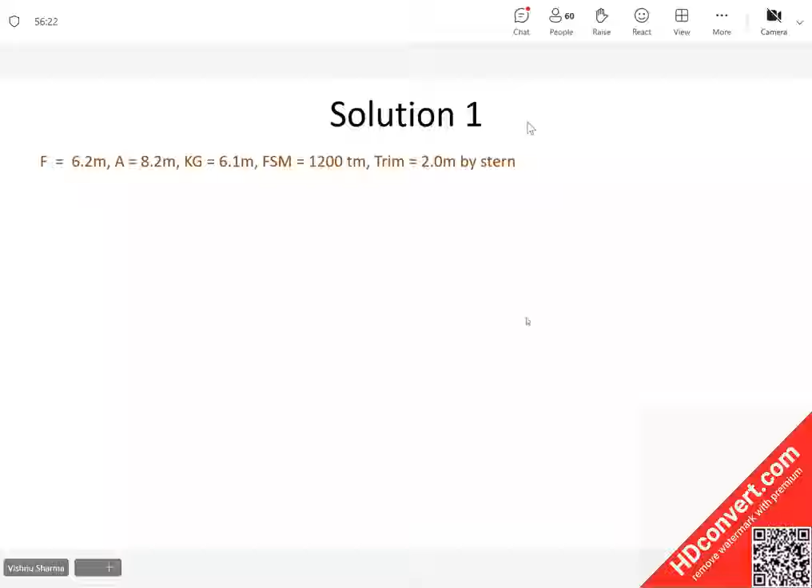7.2026, that means 7.203 sir. Very good, shabash, very good. Anybody has any doubts?

You will get the mean draft, you'll get the LCF from hydrostatic tables for it, and then you will apply this, and it is 7.203. Does everybody agree with me that the hydrostatic draft is 7.203?

Anybody in the class who's still struggling, you need to pull yourself up, otherwise you'll just lag behind. For this hydrostatic draft, can you please interpolate these particulars? Always make a column for density and draft and then interpolate these 3 particulars. In MV Inship, AF is called LCF, so it's the same. Please interpolate all these 3 particulars.

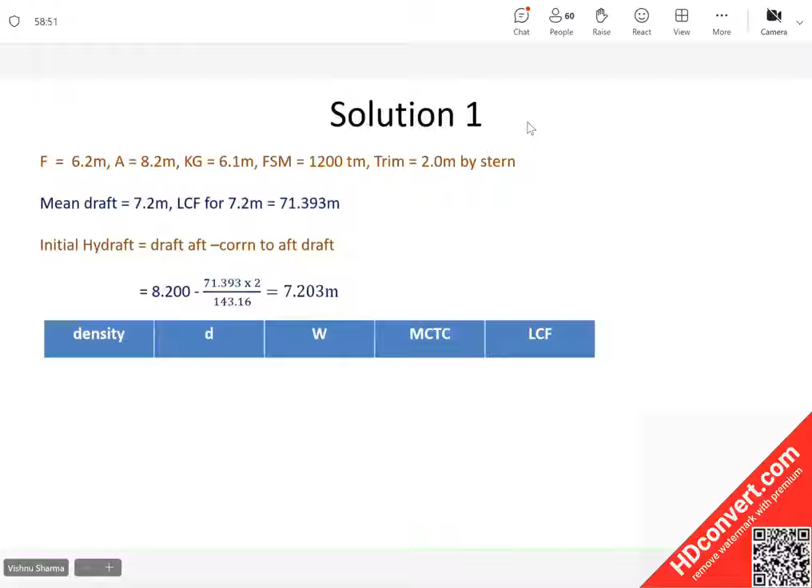No. Okay, okay sir. 14768.0, it's already come on display, beta. Round displacement off to 1 decimal place, all other particulars to 3 decimal places. The values are on display for you to match now.

We have discussed the interpolation in the first class, so I don't think that should be a problem. Anybody who's still interpolating and wants me to wait, you'll have to tell me to stop. I don't mind waiting, but... Yes sir, one minute sir, one minute. Okay please, once you're done, please let me know, because otherwise you'll miss out on what I say.

Sir, LCF is 71.396. Is it 396? Can somebody in class confirm 396 or 390, please? 390. Please check your interpolation better. This is where you'll start realizing your mistakes also. Maybe there are some mistakes I made too, that's not the issue, but these have been validated by batches, so it's unlikely that the mistake would be here.

Done sir, done, done. Okay. Guys, what does the question want? It wants what will be the virtual GM at critical instant. And if you recall the sequence of things...

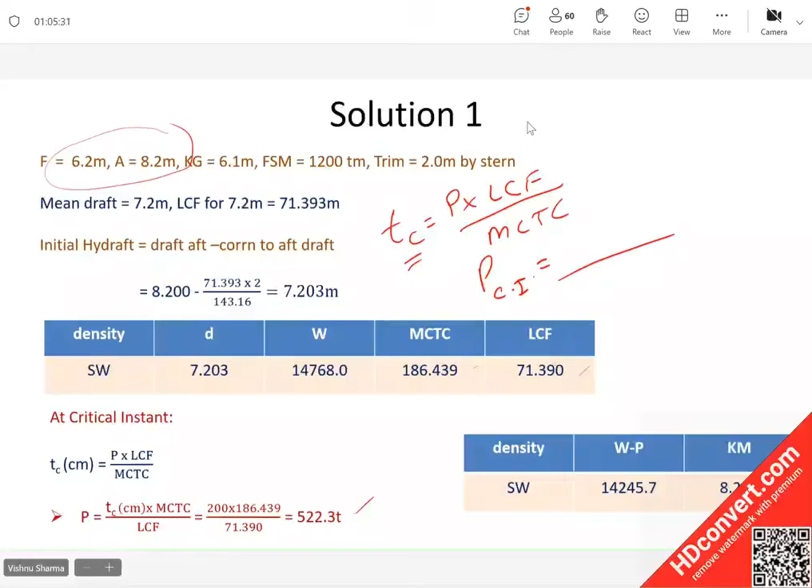Everybody's got 8.261, guys. Anybody has any doubts? No doubt, now we start with this. I usually make it a table. If you don't want to make a table, it's your choice, no issues, you can do it simply.

So Km for W minus P is 8.261 here. From here we'll subtract the kg. Please write down GM solid - that will give you GM solid, and that will be 2.161 meters. Am I right? Yes, sir.

Next, from here we'll subtract the free surface correction, 0.084. I have shown the calculations in the remarks so I don't have to run here and there to demonstrate - FSM upon W minus P is 0.084. That gives you GM fluid.

Now once you have the GM fluid, the last thing you have to apply is the virtual loss, P into kg upon W minus P, 0.224. Yes, and the virtual GM is 1.853. That is the answer to part A of the question.

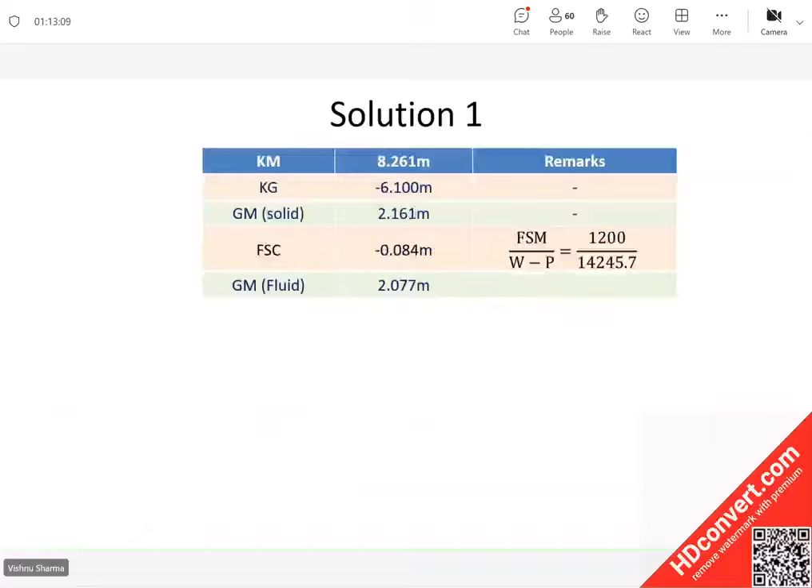So then why is this doubt coming up today? No, sir, I revised, but I forgot this one. No, you have not revised. Somebody who revises does not forget. Okay, so stop fooling around. That's why I don't cut short, beta. I teach you the basics. If I teach you GG1 upwards, I start with that, I start with KG moving up down, so I don't leave it to doubt. But if you don't want to listen and don't want to revise, then you'll be loaded with doubts only.

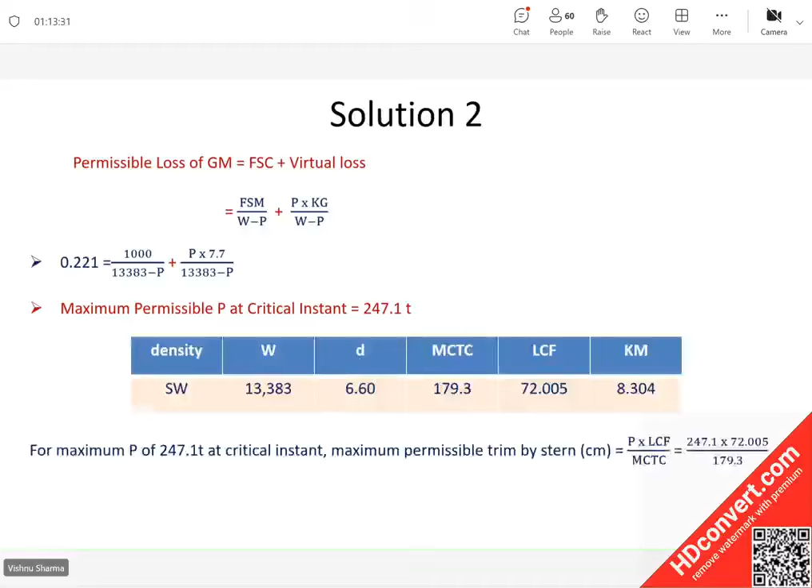Okay guys, second question I would like to skip for today. We'll go to third question. There's a reason why I'm skipping it. When we come to second question after question number 4, I'll tell you why I skipped it. Otherwise, it will create more confusion today.

MV Hinchep arrives in seawater, dry dock, drawing 3.6 meters forward and 4.6 meters aft, KG and FSM given. Find the virtual GM when the level of the water has fallen 1 meter after the stern has taken to the blocks. That means, what do we have to find? We have to find virtual GM.

This is how we are thinking, I'm not solving the question, I'm thinking. For virtual GM, what do I need? P. When do I need the P? When the level falls 1 meter after the stern has taken to the blocks. Am I right, guys? Correct. Does everybody agree? Yes, sir.

Now tell me, look at the question, at what depth will the stern make contact with the block? First contact? 6 meters. 5 meters. 6 meters, sir. 6 meters. First contact, listen to the question carefully, my friend. 6 meters, sir, 6 meters. Okay, the stern will make first contact at a depth of 6 meters.

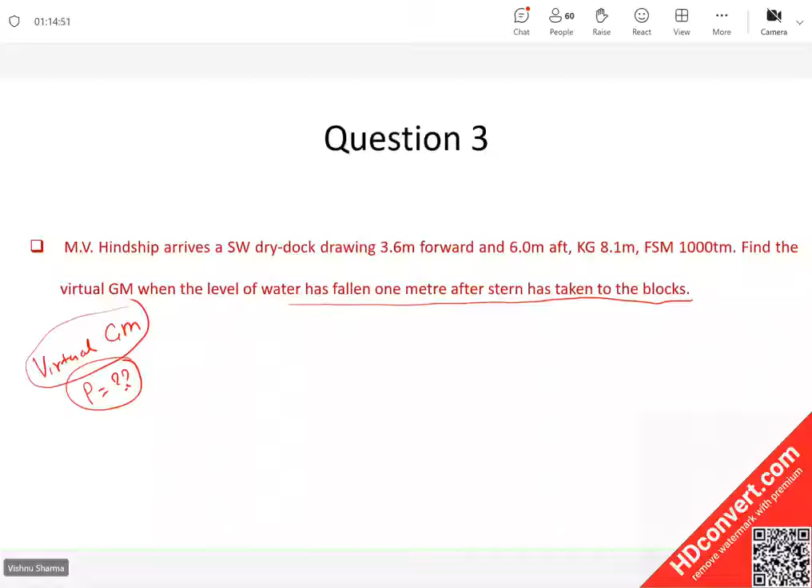Does he want virtual GM though? Then no. He says after it has made first contact, the level falls by another 1 meter. So what will be the depth at which he wants the virtual GM? 5 meters. So that means, what is the question? It is the language of the question which is going in circles. Actually, he wants virtual GM at a depth of 5 meters. That's the question, am I right? Right, sir. But in this question, did it settle at 6 meters, sir?

Did she touch the blocks at 6 meters, sir? I don't know. As per you, at what depth will she touch the blocks? Tell me. At what depth will the vessel touch the block? Tell me, what is 6 meters? Your 6 meters, because after the stern has touched, so then what is your question?

Guys, she was asking you a doubt after questioning. So because you get 2 questions back at you, no? Then only there'll be doubt. Yes, yes, okay, okay guys.

Now tell one more thing. Here is the important thing. At 6 meters, here are the blocks. These are the blocks, okay. At 6 meters, the vessel is like this now, just making contact here, and rest everything is clear. What is the depth now? 6 meters aft. Forward depth is also 6 meters. Draft is of course less.

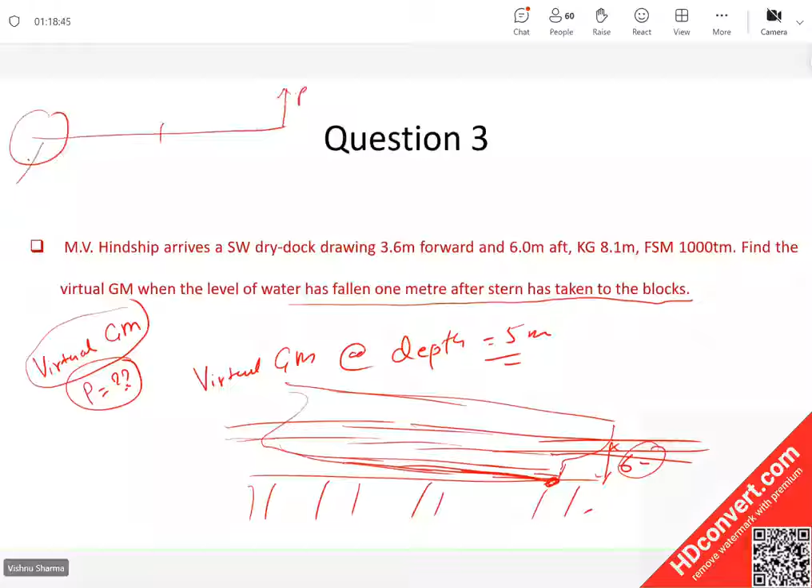Why? Because if you discharge something from here, forward draft will have two components. One is the mean rise, other is the trim component due to the change of trim. Correct, beta? Am I right? Is that clear? Correct? So the forward draft is not going to reduce by 1 meter.

So don't think that forward draft will become 2.6. No, forward draft will be suffering, or will be experiencing, mean rise because of virtual discharge, as well as effect of trim caused at the forward end.

So the only draft you can say with certainty is the draft at the point of contact. And I'll be using this statement very often, so please make sure you repeat to yourself: draft at the point of contact, after the contact is made, is equal to the depth. Depth is equal to the draft, or draft is equal to the depth, is one and the same thing.

So that means the question wants me to calculate virtual GM. You can say at depth of 5 meters, or draft aft of 5 meters, whatever you want to say. Am I right, guys? Yes or no? Yes, sir.

Okay, so first, in this discussion, we just try to understand the question. We are not solving it, we just understood what the question is all about. And second thing, we know, if he is asking us to calculate virtual GM, I need to get P. When? When the draft aft is 5 meters, or the depth is 5 meters, whichever way you want to say.

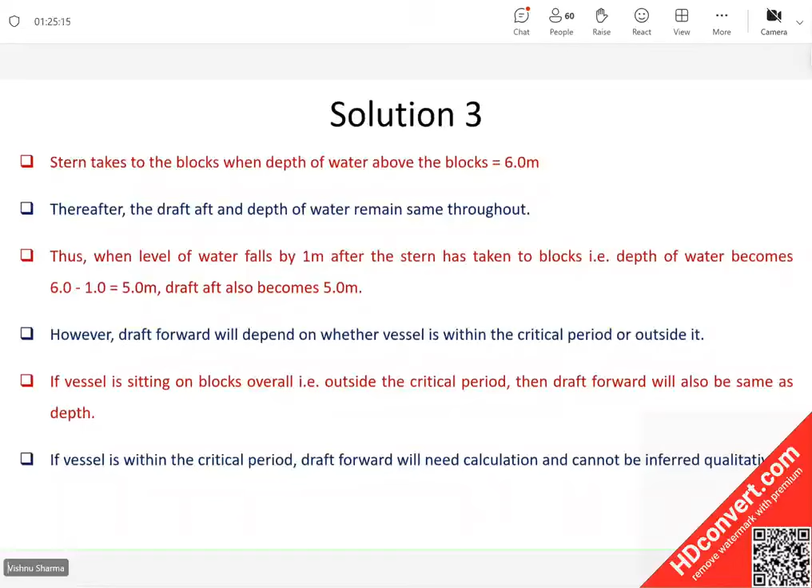Like we inferred the draft aft will be 5 meters, we can't do such discussion and say this will be the draft forward. Therefore, in such cases, it is important to establish whether the vessel is within or outside the critical period. So this is my first problem statement before I solve the question.

Any questions on what is on display? If you have not understood anything, let me know. So in every question you should figure out first. In the first question, there was no doubt. He said, calculate the virtual GM at the critical instant, so there was no doubt. You were not sure which instant he wants you to calculate, correct, beta?

Right, sir. In the first question, was there any doubt in our mind? No, he said calculate it at critical instant, so the matter was put to rest by the question. In this question, he says calculate the virtual GM when the depth is 5 meters. So he's given me the depth.

Okay, I can calculate the draft aft also 5 meters, but I do not know whether the ship is sitting completely or not sitting completely. Am I clear, beta? Yes, sir.

So guys, when such a problem exists, don't make assumptions, because if you toss a coin, one, you have missed a step, two, you have already taken a 50% chance. You may be right, you may be wrong. Okay, so first we'll resolve that. To that, I'll help you out.

Please calculate the hydrostatic draft now, calculate the hydrostatic draft of the ship on entry. 4.777, sir, 4.777. Is it right, guys? Please calculate.

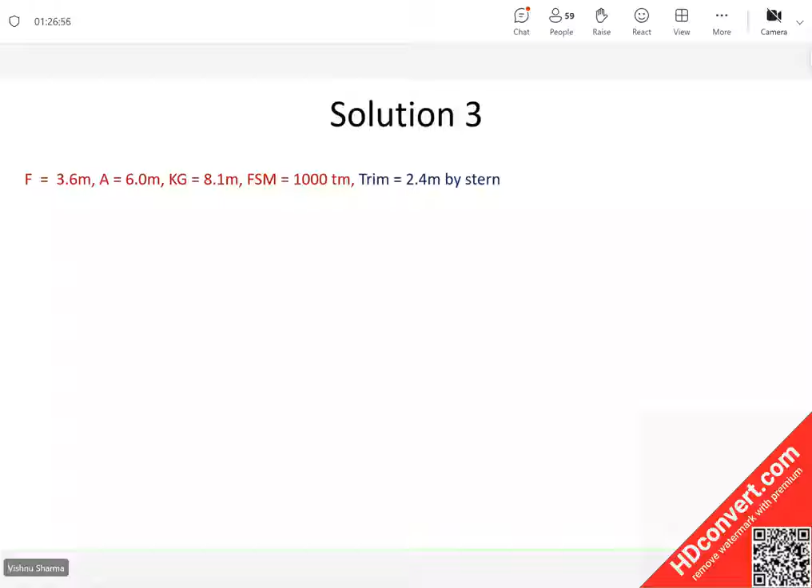Yes, sir. Okay, very good. Very good. Now,

We have to calculate first the upthrust at critical instant. At critical instant we'll calculate the upthrust. If you see the first question, what did we need? We require displacement, LCF, and MCTC - 3 things we needed. In this question I'm telling you to add one more, TPC. So those 3 things, because we are going to calculate the P at critical instant first to resolve the ambiguity - those 3 things and additionally TPC. W, MCTC, LCF reason I have given you.

For 4.777, please interpolate these particulars.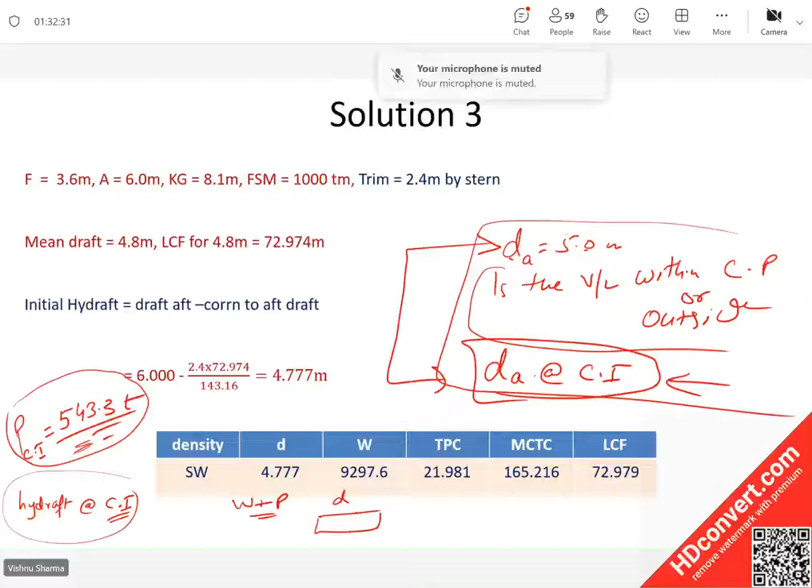If I find the hydraft against W minus P from the hydrostatic particulars, will that be the hydraft at critical instant, yes or no? Because I'm using P for critical instant. Am I right, guys? Class, speak up if you're not getting anything.

Guys, I'm not getting to understand whether you're getting it or not getting it. Please let me know, because I can clear it.

Okay, so then give me the draft. Get me the hydraft at critical instant, how many meters? 4.529 meters. 4.529 meters, can somebody confirm? I'll show on the next slide, I have everything, I'm just trying to explain it to you here. 29, sir. 29. 29. Okay. 4.529 meters. Is it right, guys?

Is he right, guys? Please confirm. Please speak up so that I know whether you are getting it or not. Otherwise the entire session will go down the drain, beta.

You are telling me that hydraft at critical instant is 4.529. Does everybody agree, or anybody has any question on this statement? Tell me, guys. Agreed, sir. Agreed? Okay. Tell me, guys, if somebody is still doing something, you can stop me, guys, you can ask me to wait. I'll be happy to wait, so don't say that I was doing something else.

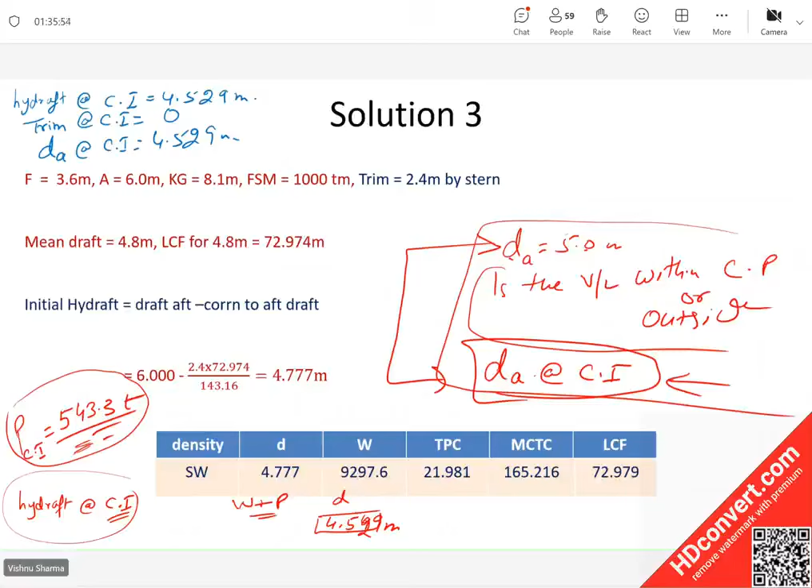At critical instant, we find P equals 543.3 tons. For this, we find the hydraft. This is the hydraft at critical instant. As the vessel is on even keel at critical instant, draft aft at critical instant is equal to hydraft at critical instant, which is equal to 4.529 meters.

And lastly, as the draft aft, after the fall of water level by 1 meter, after taking the stern to the blocks, is 5 meters, which is greater than the draft aft at critical instant, the vessel is within the critical period. So whatever is on this page is only to figure out whether she is within the critical period or outside it. Any questions, guys?

Okay. Since she is within the critical period, we do not know the draft forward. Had she sat on the blocks, we would have known the draft forward is also 5 meters, but now we can't say anything. So now we go to our trim concept.

Let me just explain to you here. We have aft, we have forward. Guys, if the question is with you, let me just open it on my phone also. What is the draft forward, initial draft forward and aft? I'll open my question, no problem. I'm opening it here. The draft forward was 3.6 meters initially when she entered the dock, and draft aft was 6 meters.

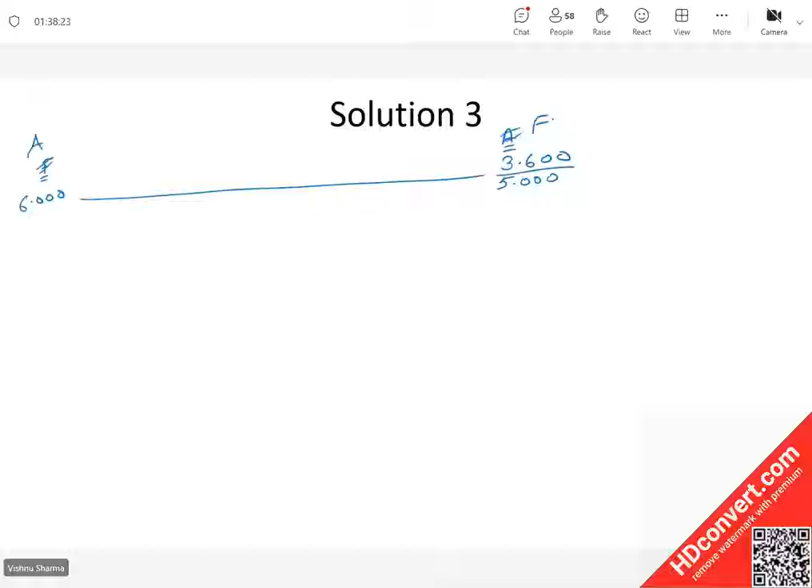You're not able to see? Forward and aft. Okay, let me write aft here, let me write forward here. Is that okay now? Not yet sir, after 6 should come 5 below. Okay, fine, sorry, my mistake. Is it okay now? Thanks for correcting.

Okay, guys? Then we know the LCF of the ship. We already have calculated it in our initial working, the table we had the LCF. So this is LCF. Now, guys, why has this happened?

What has caused the draft to reduce from 6 meters to 5 meters aft? What has caused the draft to reduce? Reduced underwater volume, sir. No, it is the upthrust. It is the upthrust. And where is the upthrust acting right now when she is within the critical period?

Where is the upthrust acting? At the stern. So here is the upthrust acting. And how much is the upthrust? P. Okay, this P has caused the aft draft to reduce from 6 meters to 5 meters, right? Am I right, guys? Yes, sir. Correct, Peter? Yes or no?

Yes, sir. Guys, have you done such a question in trim type A problems? If you, how much tons should be discharged from the after perpendicular so that the draft aft reduces from 6 to 5 meters? Don't you think it sounds a very familiar problem? Yes, sir. Plus, yes, sir, the draft aft is reduced from 6 meters to 5 meters because of this virtual discharge.

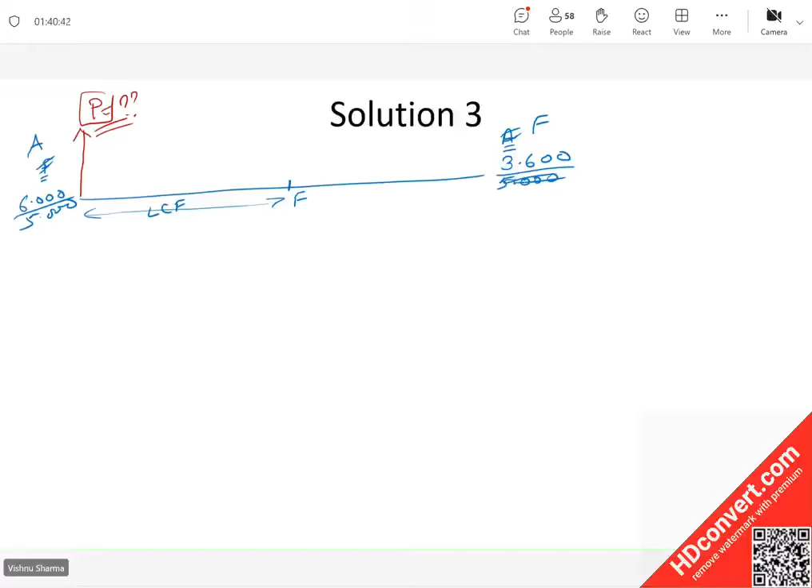Draft aft final, 500 centimeters, is equal to initial draft aft 600 centimeters minus mean rise.

Guys, trim change because of P will be by head or stern. Tell me, TA will be minus or plus? Look at the line diagram. Minus TA. When you transpose them from one side to another, it basically becomes 100 equals P upon TPC plus TA. Am I right? Yes or no? Correct, sir.

Now what is TA equal to? What is the formula for TA, guys? Trim cost into LCF upon LBP, sir. TA equals trim cost into LCF or AF upon L. Very good. Look at the line diagram. What is the trim cost? Sir, trim cost is P into LCF upon MCTC.

Trimming moment, this is L, into this LCF upon L, right? This is trim cost, guys, yes or no? Yes sir, this is what we learned in the last class. Look at the line diagram. Yes sir, yes sir, correct?

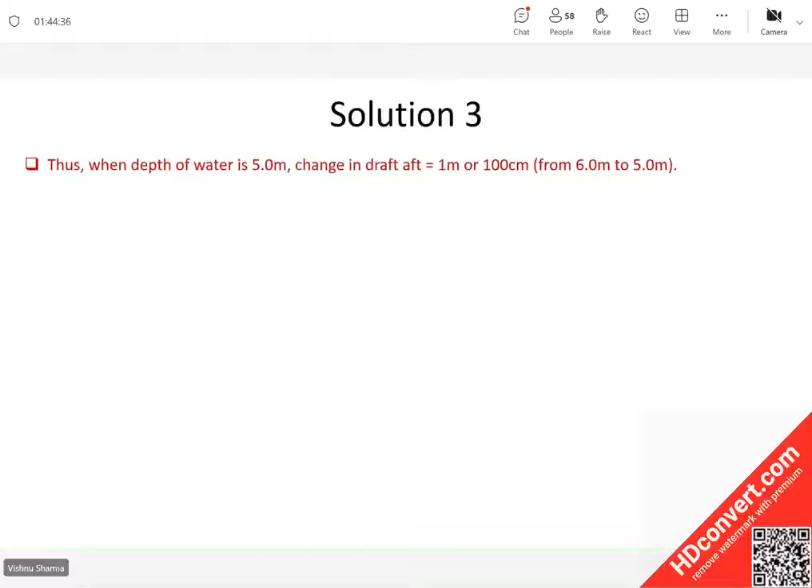Thus, when the depth of the water is 5 meters, what happens - I have not made the line diagram, I just made it in hand and showed you. The change in draft aft is 100 centimeters because it changes from 6 to 5 meters. This is only an explanation of it.

As the vessel is within the critical period, the change in draft aft is due to the upthrust acting at the stern and is resultant of mean rise because of P and the TA component of the trim cost, which means change in draft aft, 100 centimeters, is equal to mean rise plus TA.

Is equal to this. Can you now calculate P, guys? 369.44... 369.5 tons, good. If anybody has not understood anything from this question, please let me know.

Even if I have to go back or explain something some other way, I'll do that. But you guys should not just say, I'll see it in the evening, maybe I'll understand. Don't leave it for yourself to waste time on it. If you have a problem, let me know.

So guys, when the depth of the water comes down to 5 meters, the upthrust will be acting at a single point, that is the stern, and the value of the upthrust will be 369.5 tons. Am I right? Yes, sir. Right.

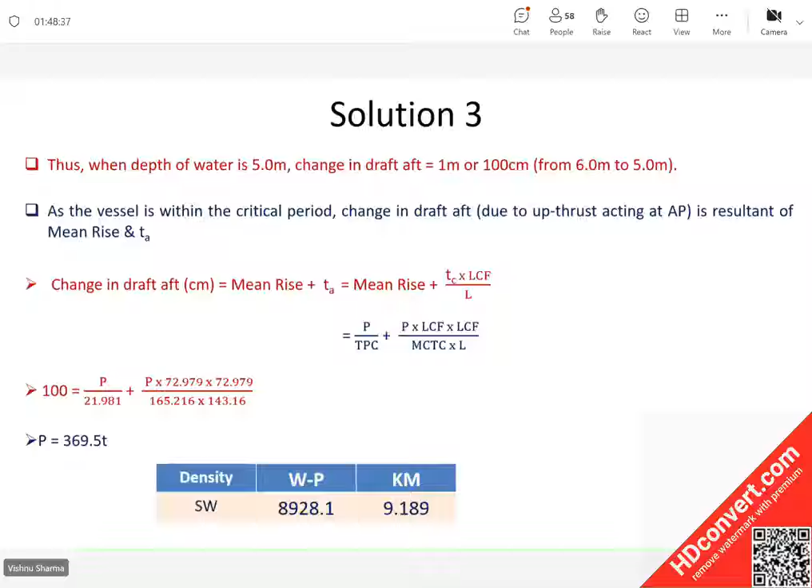Here is the working for the GM, and that is the answer to question number 3, 3.642 meters is the answer. But in this question, since the stage of the dry docking was not clear from the question, we first had to determine the stage, whether she is within the critical period or outside it. That stage was to be first evaluated. We did the evaluation, and then based on the outcome of that, we decided on our course of action to get P. Once we get P, this table will be a standard table to get the GM, virtual GM, in every question after getting P.

Guys, what you need to do is revisit the concepts, revisit question number 1 and 3. Revisit does not mean that you just learn question number 3 and say I'll do it like this. Please talk to yourself, reason it out. If you're not able to reason out something, let's discuss it in the next class at the beginning tomorrow itself. Tomorrow morning we are meeting again. So please spend some time tonight, an hour and a half. And a small thing you have to do before we meet tomorrow, you have to read this question number 4.